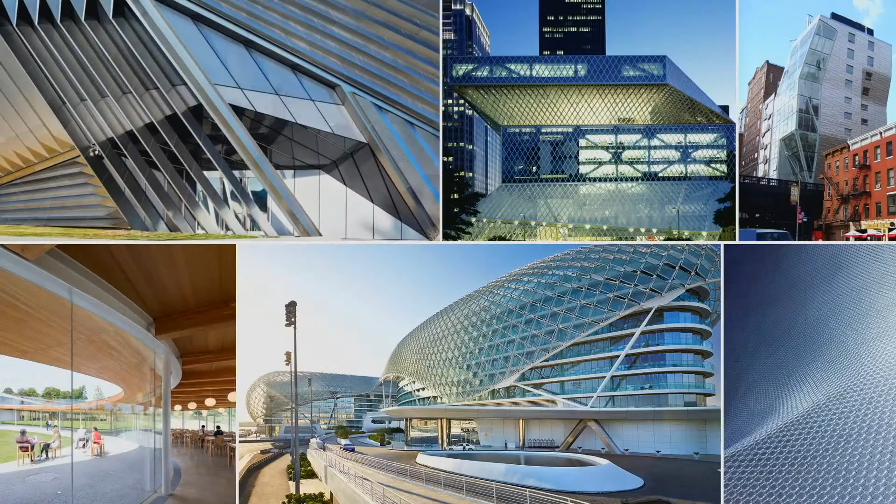We've had the good fortune over the last, actually we're 20 years old next year, of working on really spectacular projects throughout the planet with spectacular owners, architects, contractors, engineers, of all sorts of scales, materials, locations. It's been a wonderful experience, helping develop complex projects, beautiful little art pieces, very fast timelines, all sorts of conditions that come across when making complex facades.

Specifically, I want to talk today about what we view as integrated design and information documentation. It's a sort of philosophical stance we've taken on how to produce facades, how to document facades, how to see through facade design from an ideation stage all the way through to construction and on-site, and how we work through that process.

We tend to work as early as we can in the process, helping owners and architects technically develop their facade. Over the years we've had this idea: why can't we see this process through a bit further? So we've taken on opportunities to engage more in the construction process and be involved in the built product itself, whether through a self-performance aspect, working under a contractor, or as part of a design build team to develop facades and help deliver them all the way through from ideation stage through construction.

And so it kind of started with this early class of projects where they're a bit smaller, or they're a bit smaller roles, but sort of developing this idea of how do we take this information and produce the facade, and how do we produce something that is both meaningful from a philosophical standpoint, because that's kind of what I'm interested in, but also from a constructability and a process standpoint.

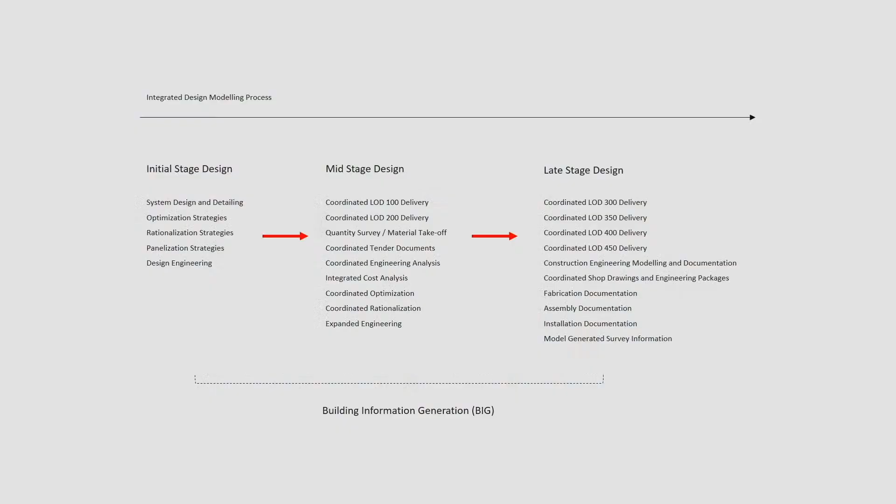Because at the end of the day, you're really interested in how things get put together, what are the logistics as it moves through the factory, what are the logistics as it moves through the site, and how do we help through this process. So I'll touch on this extremely briefly, and then get on to the secret project, which gives me a lot of anxiety now because it's way too important now.

In this project, we were providing panelization, modeling. We provided the final engineering, the final system design, final LOD 400 fabrication modeling, all fabrication documents, all assembly documents, and all assembly and site coordination models and documentation from a small integrated team. It's one of those projects where drawings don't make any sense.

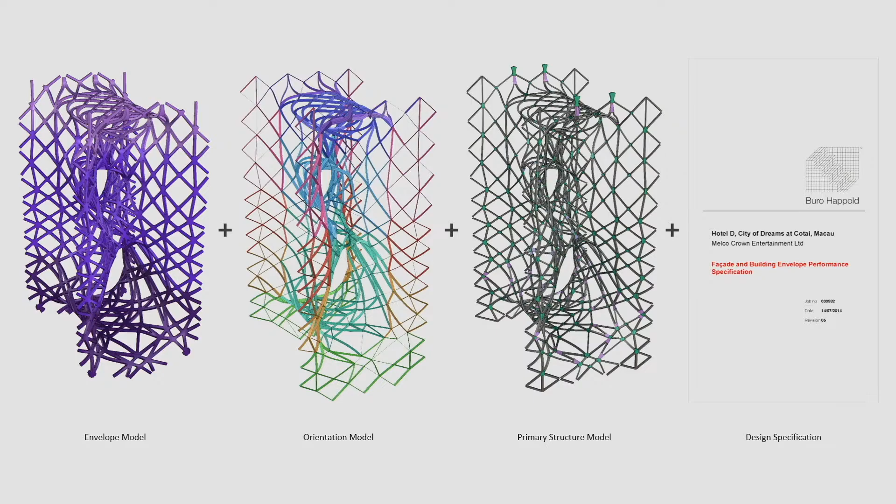There's just no reason. I think there were 3 or 4 details for the exoskeleton cladding as part of the tender package. But really the most important bits were the geometric models defined by Zaha that gave the envelope as a sacred surface, a structural orientation, structural model, and the specification in this case from Buro Happold. These sacred objects, you put them together to formulate a larger project.

In this case, we were tasked with filling in the blank. So we had the structure defined by Buro Happold. We had the envelope defined by Zaha. We just had to fill in between to make sure that it actually attached to each other.

You get a sense there's an infinite number of conditions as you're moving through this project. We view it as a primary challenge as an author of design, of a model, of information. It's easy for us to understand how this thing goes together—we've put the models and scripts together. But the real challenge is describing it down to the component level, to give to a guy in a factory you've never met, for him to give to another guy in another factory, and so on, until you've got 300 people between you and putting this thing back together correctly. So this is the philosophy we embed in all this information generation throughout the process: how do we tell the guy making this bracket to convey the next bit of information all the way to the final product.

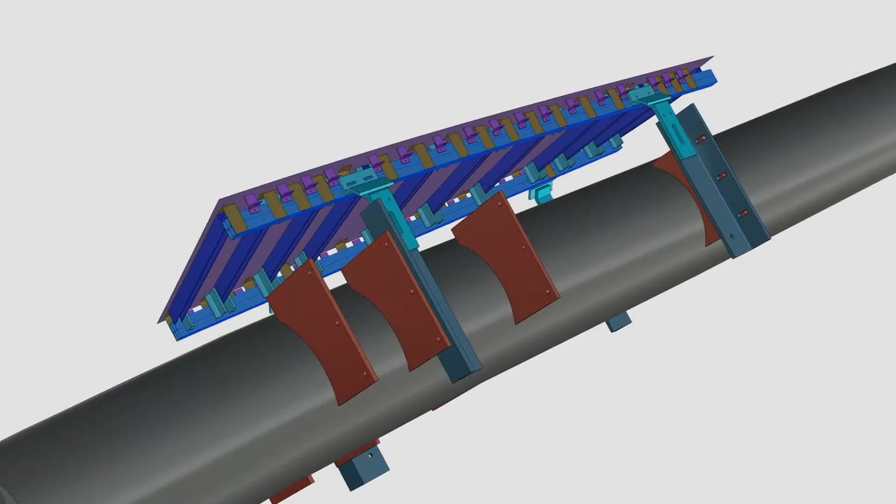You make a model and repeat these tasks—little tiny ideas you put together, repeating it over and over until you get a model that has a bit of chaos in it. And then this is now, as we know, good.

You see this other project, modest in terms of unique parts—we had about 1.2 million unique fabricated parts across about 18,000 square meters of cladding area. You get a sense of the primary structure, a bit of chaos, and the scale of the panels as workers put it together. At the end of the day, for us, it was a success because the built product looks like the rendering. We had zero installation issues, zero communication issues.

For me it was a very positive reinforcement of this idea of creating a coherent set of documentation through the entire design process, which has led us to a larger class of projects—much more complicated, much more ambitious, and even bigger than Morpheus.

The projects I'm going to talk about today—this is actually the first time I've ever talked about them, so it'll be a little rough, I apologize—include the Plaza Towers on the left, by Foster + Partners.

Another project we currently have is also with Zaha's office. We're working with Far East Aluminum in Hong Kong, providing design and fabrication services for a very complex tower in central Hong Kong.

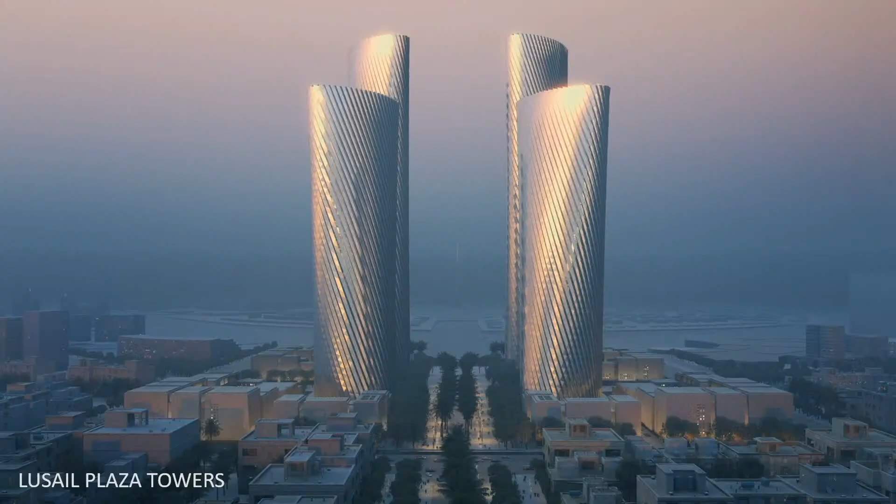Lusail Plaza Towers is a 4-tower complex in Doha, in the Lusail City, just north of central Doha, for anyone familiar with it. It's two 225-meter towers and two 306-meter towers, with about 16 podium buildings flanking each other. It's a central tower system being built as part of a new city that's the hub of the new World Cup complex, with the flagship stadium, Lusail Stadium, sitting right behind it.

Alutech is the facade contractor for all four towers. Hydro is providing the aluminum—about 220,000 square meters of a highly specialized custom 5754 alloy unique to this project. Technal is providing all the profiling and final system design for the unitized curtain wall system. It's a huge, wonderful team, and it's been a very intense process—we're building it in less than two years from start to finish.

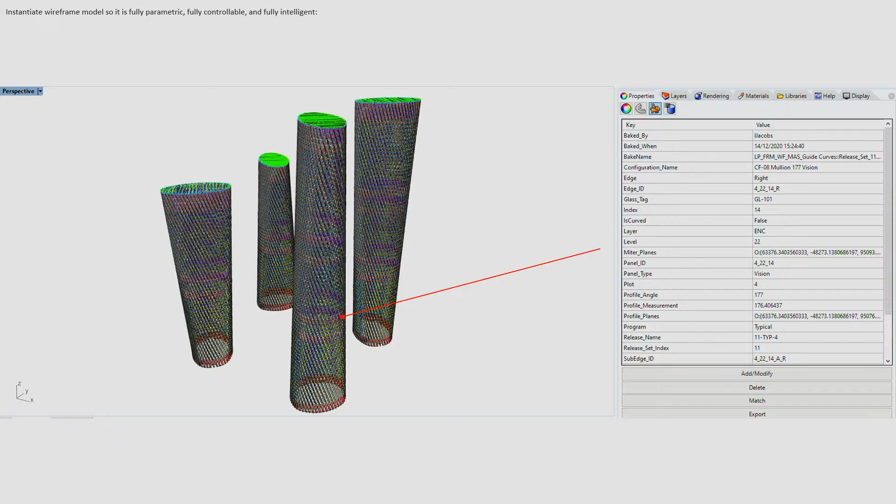It's a curve that knows where it lives in space. It knows what's next to it. It knows what systems it belongs to. It knows what angle it's coming in relative to the building, and what wind load is on it, all this kind of stuff. So you can start to peek and pull and analyze it in different ways.

To understand exactly what you're getting to and what you need to get at to make decisions. So the initial thing is we're having to rebuild the building to prove out to everybody that we can make this, that we can match the exact design intent from Foster's, and that we can also make it in a manufacturable way.

In this case, we're re-optimizing the building to get the exact distribution of glass panels that were tendered, but also tweaking a bit to optimize for the exact manufacturing process we want to put in play, so we can execute this as quickly as possible.

In this case, which I'll get to shortly, we're doing cold bent glass for the entire tower. There's not a single piece of flat glass—it's non-rectangular, and it's all cold bent, either from a flat panel pushed into place or a kind of molded cold bent panel.

Here we're looking at different strategies for different thresholds of cold bending—this is the amount of out-of-plane each panel has. We're looking at whether we're matching the SD geometry that was tendered, but also looking at the economics of the glass and how we can produce it, to find the right cost balance for Alutech to proceed with procurement of material.

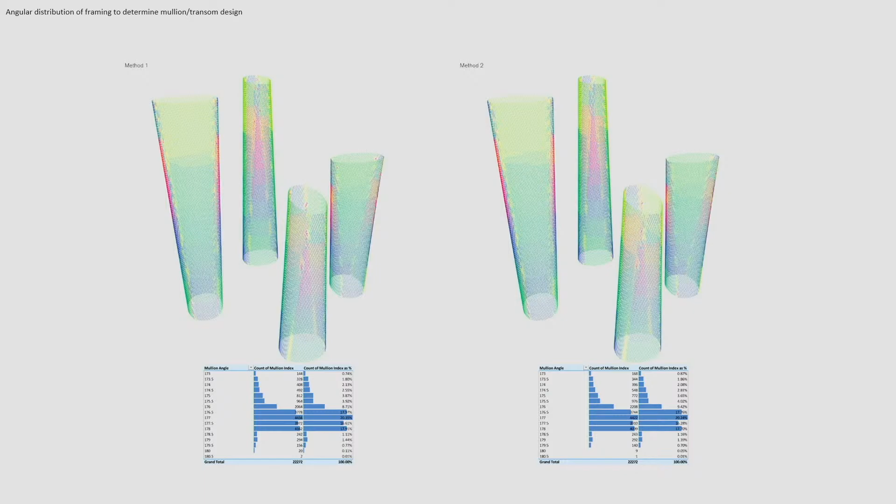In this case, again, these are all actually exactly the same model, which I think is a key point. Here we're looking at it because we're talking to Technal at this point, trying to understand the complete design configurations of what every single volume is going to be on the project. So we look at the model in different ways, measuring the angle between the panels so we can design the dies from an early point.

We're mapping all the wind loads to provide these engineering optimizations, so we can find local reinforcement if we need to, or find out our threshold and what conditions we need to design for. This really saves time and material, because we know we don't need to design for the high load case everywhere, but we need to find where we do.

In this case, we're working with Hydro specifically to optimize the panel width, and we're using about a 2.6 meter wide aluminum sheet. We're buying 11.8 by 2.6 meter sheets and anodizing them. Alutech actually built what I think is the world's largest anodizing bath as a result, to make these panels.

So here we're working with the whole supply chain to find exactly where we need to massage the shape of the tower and the shape of the cladding, so that we can procure all the material in advance. Thankfully, because of COVID, we had to get as much as possible in as quickly as possible, to make sure we could build this building in the time needed.

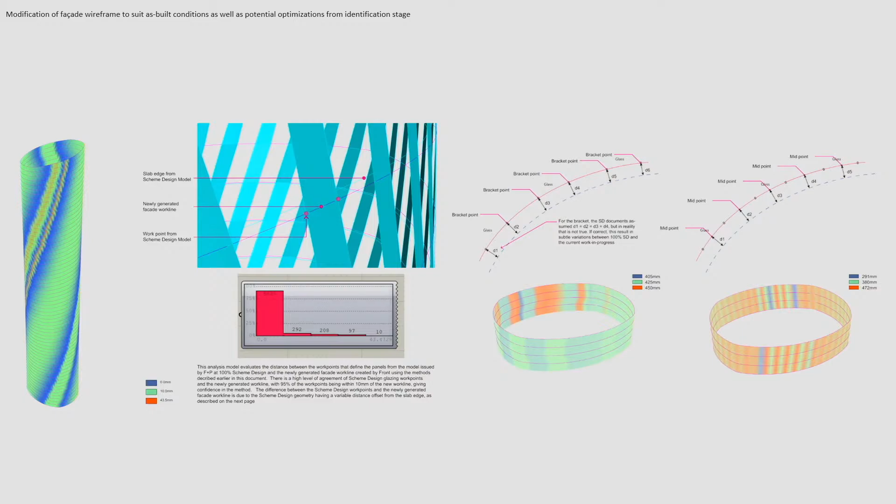Part of this is also a sort of global rationalization. You start to tweak the floor slabs a bit, and the overall mass of the building, because we're changing the shape of the cladding and need a response that changes the shape of the building. What's nice is we were able to change the building's shape way faster than the architects could finish designing, so we gave them the floor slabs and the rest of the building, defined basically from the size of the aluminum cladding.

Which I thought was a pretty unique experience. In this case, going back to the architects and proving that our newly optimized design fits within the original tendered process. So this is overlaying all of the models and going back to the owner architect to say, hey, we haven't changed anything, but we're trying to make this work within the procurement channels possible in the time we have.

Combining everything together, you get a fully rationalized building, full of really rich metadata that you can start pulling apart to analyze in greater detail. Another key thing you're able to do early on with these processes in place is build a fully constrained global FEA model of every single panel, every single connection, of all the towers, to provide all the reactions back to the slabs.

So we're coordinating on day one with the structural engineer. I think this whole model was about three weeks into the process, and we already had every single reaction to every single floor slab, and we were designing all the embeds. Very complex tower - same model, a little more detail, providing all the global engineering of every single panel, every single connection, from the same process.

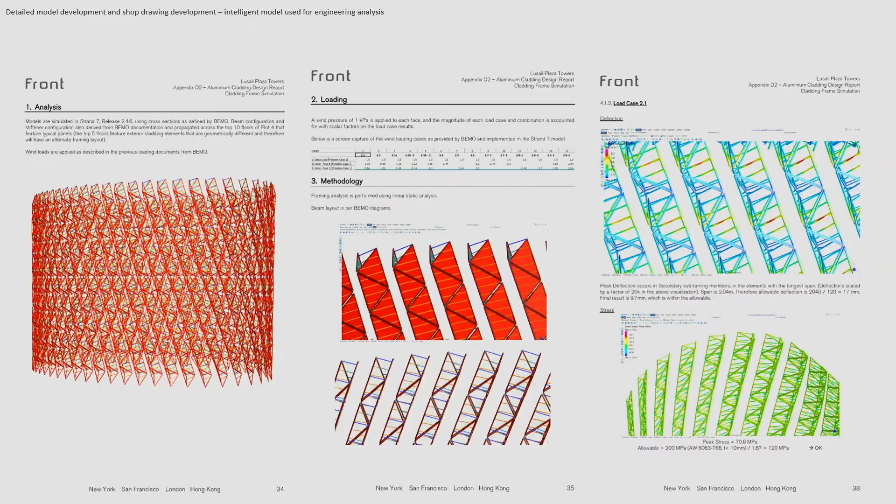This was the original, I think month 2, complete material takeoff of every single mullion and every single transom, which allowed the advanced procurement of an enormous amount of material.

So then we get into, that's the global analysis, and you dive into, okay, how do we actually make this thing? I'm going to try to tell this story - this is the first time I've told it - about how we thought about the cold building panels, and then from the glass perspective and the framing perspective, because they're two sides of the same coin.

So conceptually, you have a tower, and the easiest answer is to triangulate everything, but the architect was not interested in triangulation. So instead you have quadrilaterals, everything at a 20-degree angle, this parallelogram spiraling up the building. Well, how do we do that? How do we deal with that?

The easy, straightforward answer is flat panels are cheaper, flat panels are better. However, on a multi-curved surface, a flat panel starts to get this popping effect. That popping effect has huge implications - the thermal sustainability implications are massive. You have huge thermal bridges, a lot of condensation risk. You just end up with a leaky, poor-performing building. It's not a good strategy.

Secondly, it's very, very expensive to make. You already have a very complex facade, with millions and millions of small subparts that you now have to consider to manufacture and get right - which then will leak.

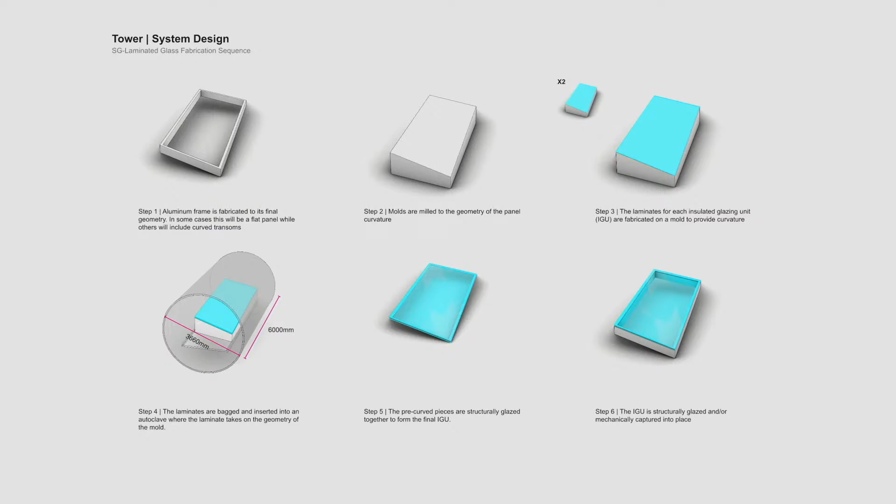So in this case, we did a slower but more expensive method of cold bending: an SG lamination where you heat and pressure in an autoclave. You take 2 pieces of glass, laminate with SGP, put it on a mold, then put it in an autoclave, and it comes out in the perfect shape. This works well for very subtle curvature, because you can get almost any shape out of it to a certain extent. It's a very slow process, as you can only do a very limited number of panels at a time, and at the end of the day you get extremely subtle curvature out of a piece of glass using this methodology.

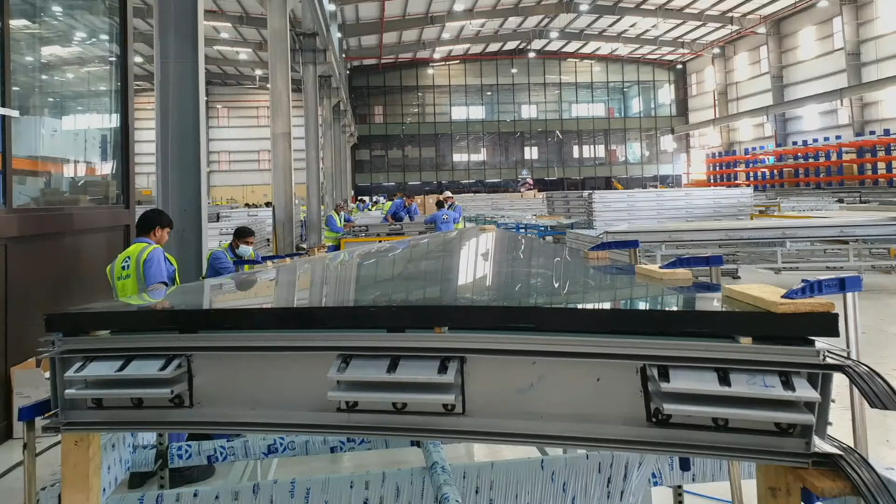Working with Alutech, they've found a pretty good way to perfect some of these methodologies at a large scale. You can see here a typical flat panel that's not curved, and get a sense of the curvature we'll see on the project as these panels are navigated. This is a curved panel with at least one curved edge—probably about 225 millimeters out of plane, which is quite extensive. Here you can see the curvature on this one edge, which forces a particular manufacturing process.

This is actually a very technically challenging process because you've got to cut everything at the end of the day from a flat piece of material. The glass comes flat, off the float line as a rectangular sheet, and you unroll that into the curved shape—it's always bigger than that flat piece. So we have to determine how big a flat piece of glass we need to buy, and what shape we need to cut that flat piece into to get back into the curved shape.

And whether that surface matches anything in reality, you actually don't know. So we needed a way to inject reality into a model to pull out what that piece of glass is that we need to cut.

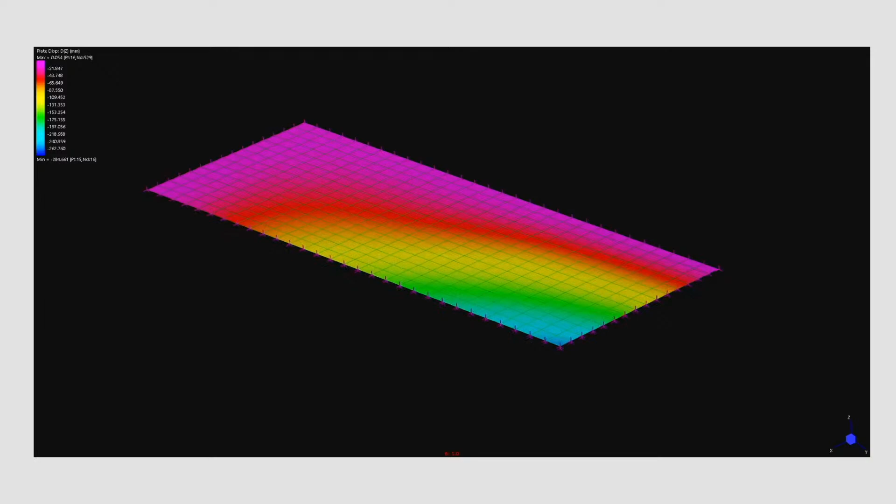So in this case, we built a finite element model of every single piece of glass on the project and pushed it back into its flat form. We did that many times to find out where we have stress conditions, where we have deflection concerns, all this kind of stuff. But most importantly, it gives us rules about how we can interpret the piece of glass and how we need to cut it.

You can kind of see here, we haven't made any good images yet because we literally just got permission this morning to do this. But the numbers on the left indicate the amount of deviation from a straight line. There's an actual subtle curvature when you unroll this piece of glass along the long edges that you need to cut into the flat shape, such that when you put it in its curved shape, it forms into the right part.

We do a poor man's machine learning through regression analysis of literally thousands of panels to determine the rules in which to make that glass and make those shapes work, and apply those en masse. At the end of the day, we end up with two drawings: one shows how you cut the flat piece, and here's how you put it together, and here's the CNC information to do that.

So you go through this extremely massive, convoluted process to give a DXF file to basically a CNC machine to cut out a piece of glass. But what's really nice is then they just stick the two pieces of glass together, it goes in the right spot, and no one has to think about anything.

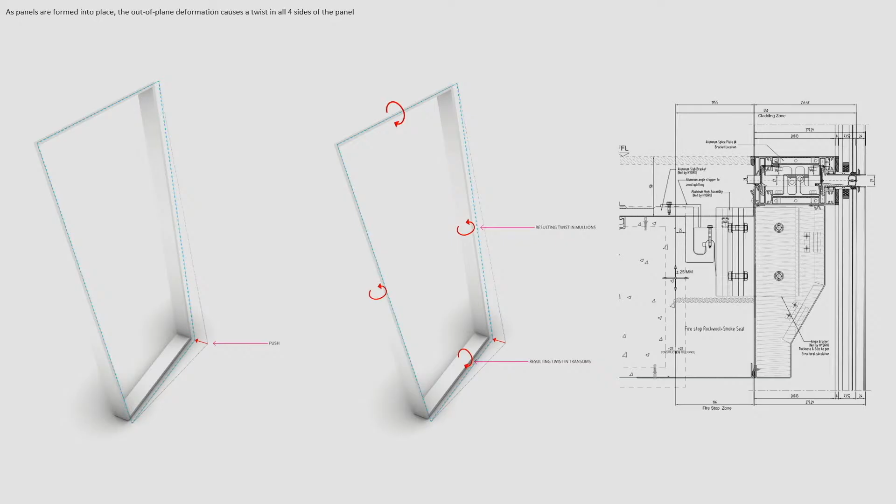When you start to push one edge, and they're rigidly connected at the corners, everything starts to twist. The mullions twist, the transoms twist, and so how do you prevent that from happening? Because there was no scenario where the architect or the owner was going to tolerate or accept a transom that is twisting on the edge, especially when your finished floor is meeting up flush with that.

But now it's like, okay, how do we define a system? How do we think about a way to ensure that the transoms themselves don't twist? There's a couple of geometric concerns, but most importantly, there's a sort of assembly and warranty concerns.

So in this case, we have you put the transom in. The ideal scenario is you let the corner of the transom meet up with the bottom of the mullion. That introduces a gap between the transom and the mullion, and that gap is right where your glazing tape goes. The glazing tape, though, suddenly is making a jump, which starts to maybe void some warranties, may create some assembly conditions, and this is kind of a no-go scenario from an assembly standpoint.

So then we said, okay, we need to find—actually the glazing tape line is going to define the overall geometry of the framing system, such that there's 0 or like 0.2 millimeter gap that is acceptable. We continue that glazing line all the way around, and then re-rationalize the entire building wireframe geometry about that glazing line, such that you can have a continuous seal to set your glass down.

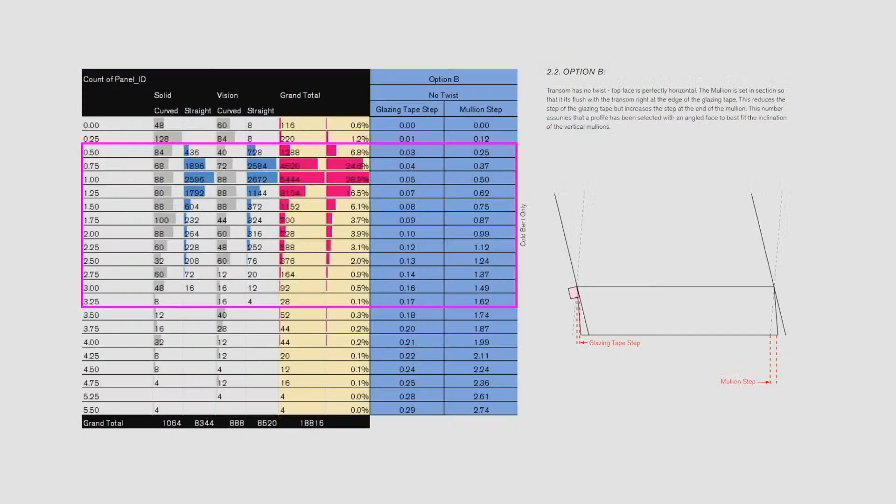Another key aspect of this is to trick the transoms into being flat when they're installed. What we do is a complex mitering of every single transom on a double angle cut, such that when you screw them together, it does a counter twist and undoes the twist it wants to do when flat. It's kind of hard to explain.

Maybe a video will show it here in a second. But on the left, you can see the traditional, pre-rationalized approach of the framing system. If you did not do any rationalization, you would have gaps that go across. So you micro-adjust every single transom and every single mullion to get a very flush surface for the glazing tape to go around, so you don't void any warranties.

You get a sense here, this is the first framing system we made. It's the best video I could find on short notice, but you can see as they push it together, very low tech, trying to get it the right shape with wooden blocks, you can see the mullion twisting out of plane as it comes into line with the transom. So the key thing here is we build all of the frames in 3 dimensions in their final twisted form.

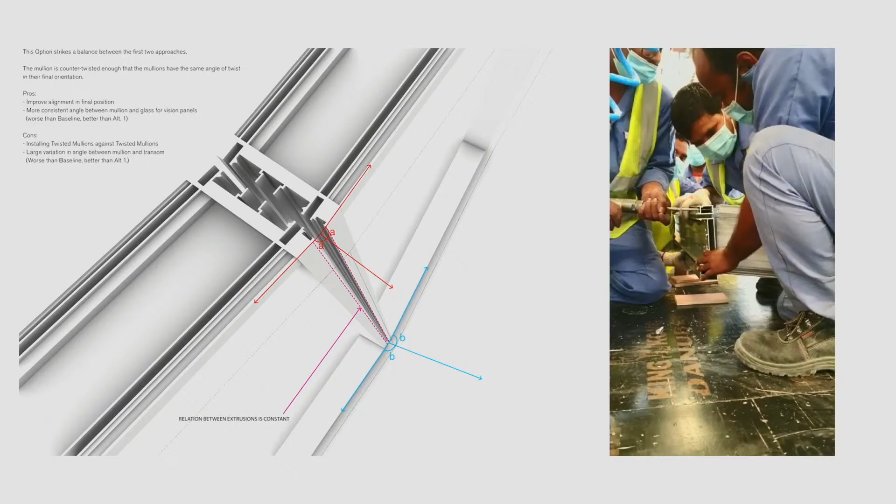We put the glass onto this final twisted frame. We add the silicone there such that there's no residual stress in the secondary and structural seal between the frame and the glass, so that when it goes into shape on the building, we're not going to have any permanent stress in the structural silicone.

Here's an example of one of the more egregiously twisted panels we have. But we have roughly 80,000 square meters of glass across 13,000 panels. Every single one is unique. There's zero repetition. They're all slightly different and slightly out of plane.

There's a whole other bunch of stuff I could talk about regarding how to actually manufacture this, how the whole workflow goes from the wireframe into the CNC machine, but another time.

Here's us roughly a week ago. We've got approximately 100 stories worth of building built in about 10 months. It's been a Herculean effort from everybody at all the contracting teams and all the subcontracting teams. It's been a bit of an insane ride, but here we are.

Oh yeah, crazy thing - tip to tip, the panels are 7.3 meters. Manufacturing and moving around and trying to control a 7.3 meter cantilever panel has been an interesting challenge. So I probably went over, but...

That's a secret project for you there. Evan, thanks a lot for all your explanation. What was really true - he just got this morning the approval to present the project. It was just this morning when you received the email that you're allowed to present it, and thanks for that. It's broadcasting worldwide for the first time. Thanks that the Alutech guys are with us. So if the audience in-house today has some questions, don't hesitate to go to them.

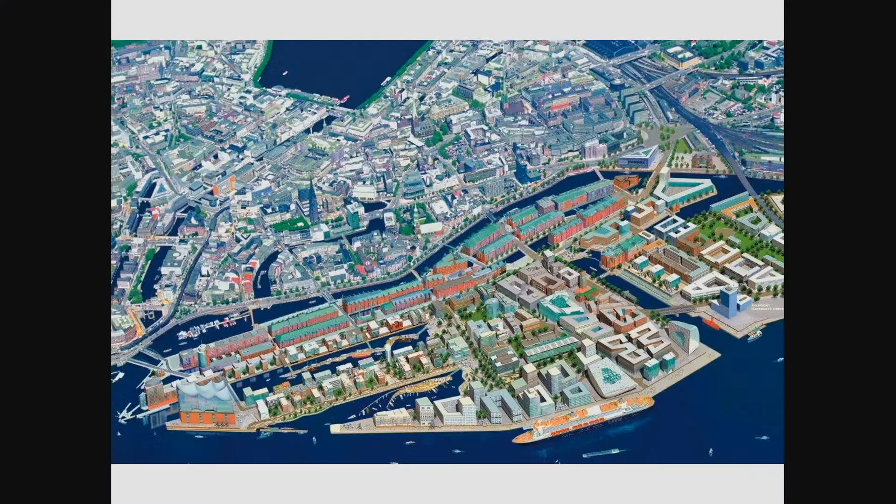What we have here is the HafenCity, Hamburg, a very courageous project that started off in 1992 with a master plan from ASTOC Architects out of Amsterdam. What you see in the north part of the picture is the old structure of Hamburg. You may see the old Speicherstadt, the old warehouses that separated the old part of the city from the customs harbour and the south.

All these buildings in the area south of the Speicher buildings have been built in the last 15 years, and there's been a huge amount of construction - that's only half of it. The other half of the picture is now in construction. It's a very courageous project, and through that we've been very fortunate - I think we're now on our fifth project within the harbour city.

What you may recognize also in this picture is the work of our colleagues from Herzog & de Meuron, Basel - that's the affectionately known 'Elphi,' the Hamburg Philharmonic. Wonderful building, very controversial, very expensive, but now that it works, no one says anything about the controversy or the price, which is a bit of a tip for the future generally when we have these problems.

What is not in the picture is our colleague from London, David Chipperfield's Elbe Tower. The Elbe Tower is, or will be - it's now groundbreaking - 240 meters high. Until then, one of our buildings will still be the highest building in Hamburg. You can see the Elphi in the background.

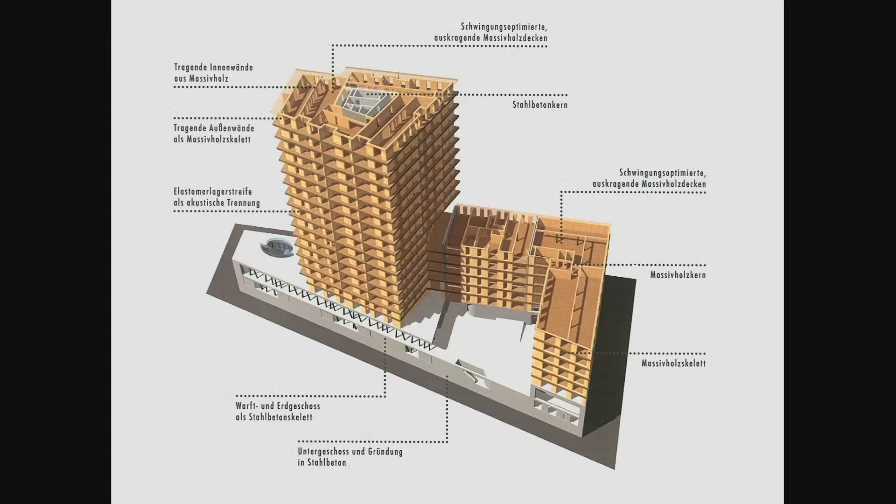This sketch basically shows how much concrete we're actually using in this project - as little as possible. Where we do have to use it is in the basement, quite sensibly, and in the plinth of the building that you see here in white. Rather like our spines, we have the core, the staircase and the lift core right in the middle - that, of course, is reinforced concrete. But everything you see in brown around it - the massive floor slabs, the columns, the facade, the walls - it's all in wood.

That was our main aim, because when we talk about projects now we talk about carbon footprints - it's not just a fad or a word, it's something we now have to take very seriously. In the 80s and 90s we talked about how much a building costs, but now we talk about life cycle costs. This is becoming very important to our clients because the money they get for investment is green money - large financial institutions want to make sure their investment goes into a green project. It's interesting how things have changed: clients from 20 years ago who weren't interested in sustainable building are now the ones putting it biggest on their websites, saying we're very green developers or investors. Things have changed a lot, which I think is a good thing.

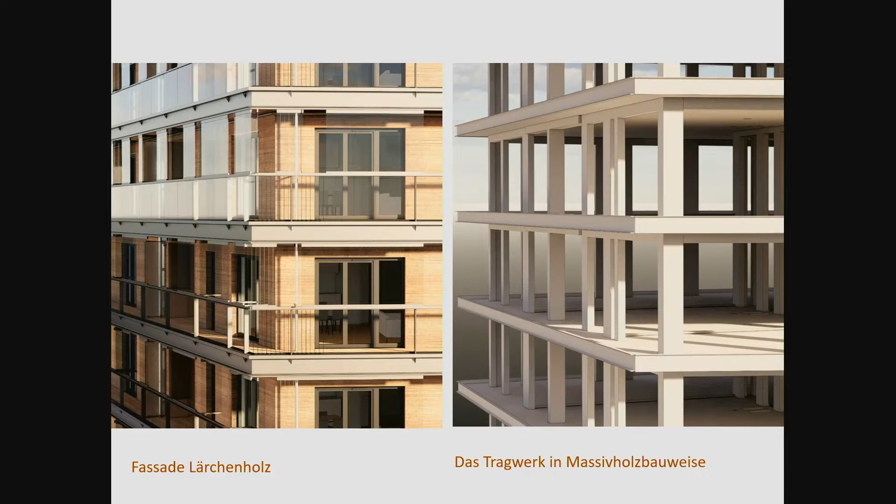This is what we call a Zug Tragwerk, a ring beam if you will, which holds the building in compression. We can see it here on the left-hand side. If you can imagine a wooden barrel, one of those old beer barrels, with steel belts that keep it in compression - that's a very similar concept.

Wood has the slight problem of minimum oscillation in high-rise concepts, and because of that we have to have these steel ring beams that keep the whole thing together. Of course, we didn't know that in those days, but now it's something we've brought into low-rise buildings as well. You can just begin to see the floor structure.

I have another drawing - we have 24 centimeters here of massive wood, and then we have a big issue from floor to floor, apartment to apartment, of acoustics. Acoustics was the biggest issue in this project. That may surprise a number of you, but acoustics is cancelled out or solved when you have mass. Mass is weight, and we don't want weight - we just want the necessary structural cross-section to perform the function. That's the 24 centimeters you see here.

We're also talking 6 meters long and 1.25 meters wide - that's the planks, the deck systems that we use. On top of that you have a lightweight screed, and then underfloor heating. In total, we were at 50 centimeters in those days. We're now down to 45 centimeters as of the complete construction.

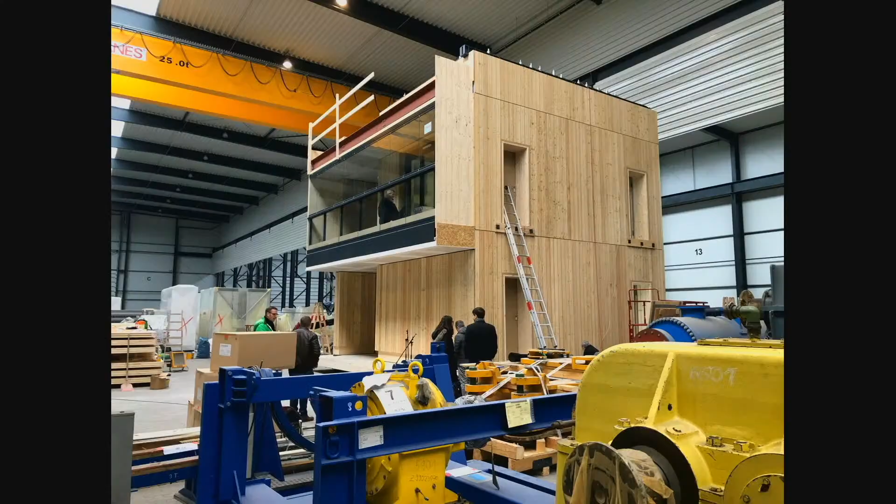Because of this building - this is our mock-up, and this mock-up basically provided us with all the information the planning authorities needed to give this building a green light. Normally when we do mock-ups, you can see aesthetic issues in the facades. No, this was purely technical - we had to find out where the building's problems were and whether our details actually worked.

So this was it, and we had a team of scientists that went in there for about a week. They took all the necessary data and did all the necessary tests, acoustic from floor to floor, horizontal from one side to the other.

In any case, we gave the planning authorities the necessary information they needed to give us a green light, and that was, I think, for all of us, a very joyous day. We are now actually on, I think, about the ground floor. We'll probably be starting in about 6 months with the wooden construction.

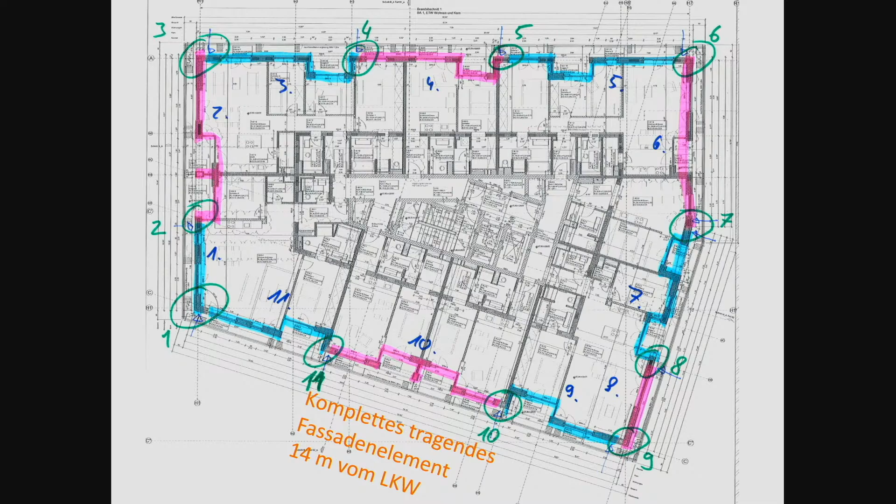This sketch basically shows one of the greatest advantages with timber construction. We're able to do between 7 and 14 meter prefabricated wooden facade elements, and they get rolled in on a low loader and then put into position, if not shipped in. So there one saves, of course, time and money, as with the previous example, the ceramic tower that I showed first.

The issue that we have here at the moment, especially in high-rise buildings, is that wooden construction is still 8 to 12% more expensive than conventional construction. Some clients see that as a great barrier. Some clients say, I don't care, we want to find out what the future is about, and wood will play a part in our future.

I'm absolutely convinced aluminium will continue to play a part in our future. You can't compare an aluminium facade to a wood window facade. It's obvious there is a hybrid of thoughts going on, but still it's a more expensive building typology to create.

I won't go into too much detail, but what they are basically explaining here is the decoupling of the sound that passes through the floor going from one apartment to the next. Those are some of the details that we had to work through with our acoustic engineer as well as with Assmann, and obviously try to maximize the amount of wood in the building.

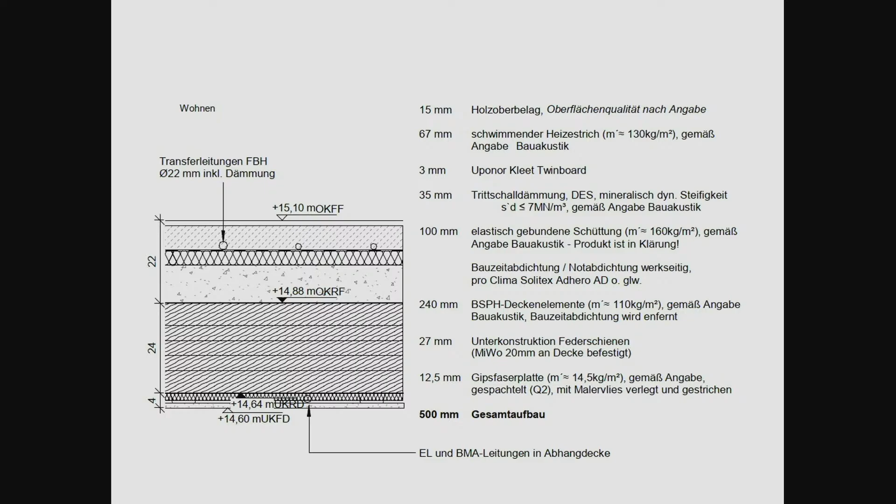This is the detail that really has caused us the greatest of issues. Because it's a lighthouse building, the client wanted to have wood on the exterior part of the building, and we supported him in that. But it is actually an issue where I would seriously think in the future whether that's a good idea in a high-rise building or not.

We have to generate a dry, if you will, sprinkler system that is positioned in the area of the balcony, which is firstly very difficult to detail, and secondly is a very expensive undertaking.

I firmly believe in the future of wood, although this is a project that a lot of people will notice when it's built. But I think the future of wooden buildings is not necessarily with facades, and not necessarily with high-rise buildings. I really believe the future of wood is up to - in Germany it's 22 meters that's classified as a high-rise building after that - anything up to that, because then you don't go into an area of fire regulations which are very, very difficult to construct in wood, but you basically keep yourself in a comfort zone which is financially viable.

I think that's something that's going to happen and change in the future. We've got 2 or 3 projects at the moment where the massive structure internally is wood, but the facades themselves are ceramic, brickwork. There's no dogma to using another facade material—the idea is to create as much wood in the project as possible. It's all about the carbon footprint. That's again something we had to learn.

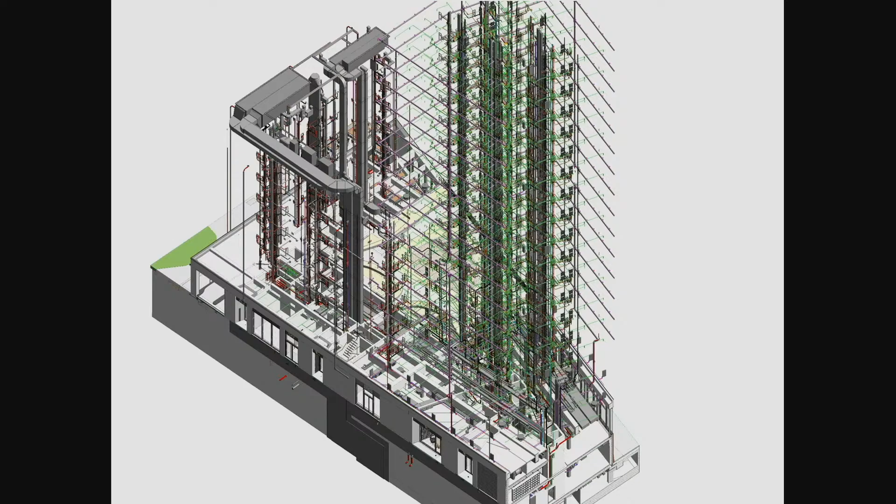I was mesmerized by what Evan was showing before about 3D design. The kind of architecture that Foster does is phenomenal, and one needs these kinds of programs. We changed probably about 7 years ago from 2D drawing, from MicroStation, to 3D Revit. The whole office was actually against this program—it was mutiny. But now it's the best thing that could ever happen to us. The communication on the level of MEP or structural engineers is phenomenal. It's quicker, more efficient, we find the problems a lot earlier on.

Why am I saying this? Without 3D, we could not do a timber building of this complexity. We are required by pre-design to have 50% of our 1 to 5 details—that's not something we were ever used to doing. The only way we can do that is to work in 3D, because we identify the problems earlier on and we're able to solve them earlier on. Revit—I'm not really a computer geek myself, although I used to love MicroStation—is really something that has changed the way we design and think about design. But it's not an obstacle, it's a huge advantage.

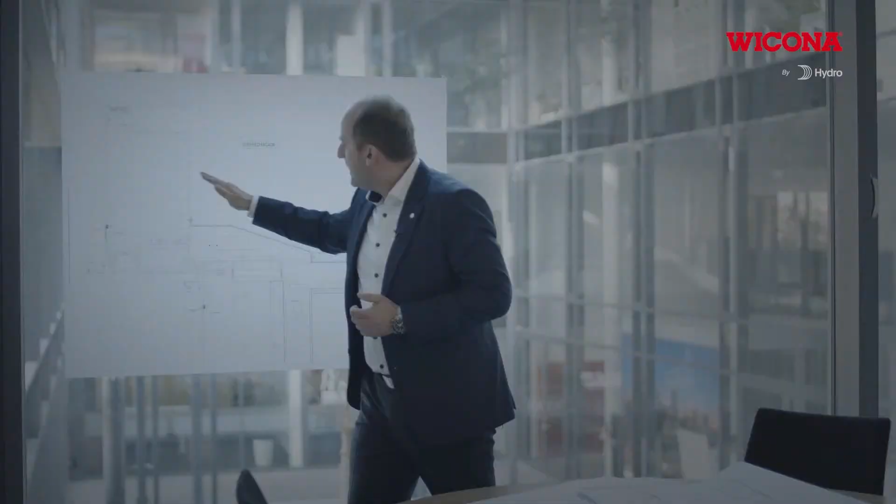But we feel we need to go beyond. When looking at the life cycle of a building, you will find that the upfront emissions represent one third of overall CO2 emissions. Our aim is to reduce by half our CO2 emissions by 2025. To achieve this goal, we are going beyond recycled low-carbon aluminum products and running every part of our business as sustainably as possible. It begins with the origin of the metal. We use Hydro Circal aluminum, which has among the lowest carbon emissions in the world.

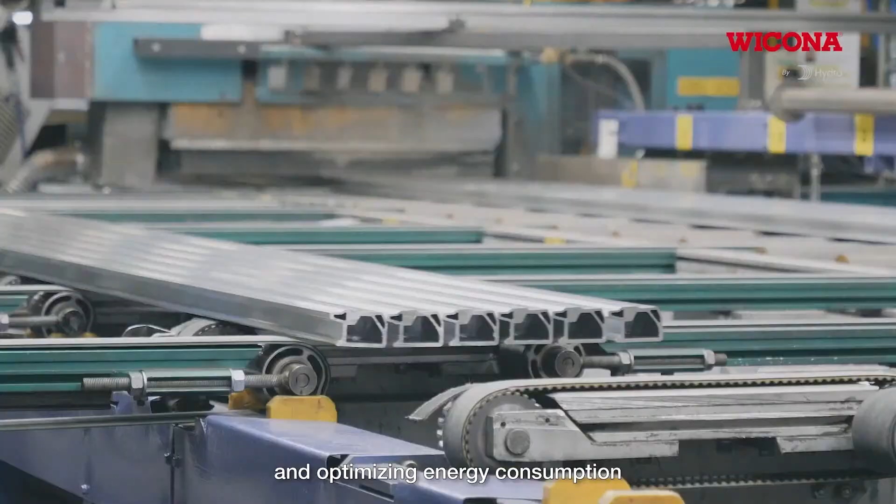We also go beyond aluminum by working with suppliers of recycled components who share the same values. We are continuously reducing and optimizing energy consumption at our production sites by investing in cleaner, renewable energy. And we are using less packaging materials and delivering in better ways. In the end, it all starts with us. Sustainability flows through every decision we make, every action we take.

But let's see the broader picture. We are going beyond ourselves to make a bigger difference. As a part of Hydro, we commit to empower 500,000 people with education by the end of 2030. We are all in this together. We know we can make a difference because we care about building a better future. Beyond tomorrow.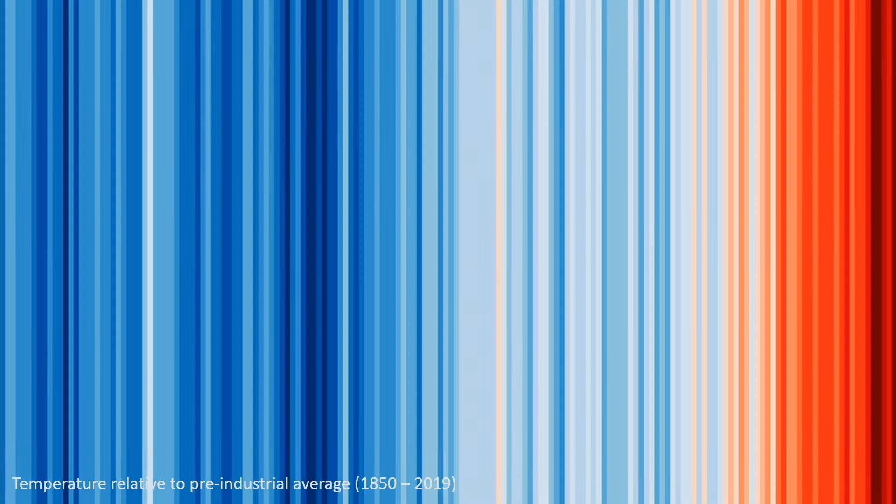When we talk about sustainability as a term, I think in 99% of cases we're talking about the energy performance of the building, and more concretely about carbon emissions. We're all aware of the turbulent weather occurring increasingly over the last few years, which is without much doubt related to the rise in temperatures over the last decades - which in turn most people agree is a direct correlation of the carbon emissions that have occurred since industrialization started roughly 250 years ago. I think that's now common knowledge.

We all know that construction and buildings play a relatively high part in this, estimated at 40% of current CO2 emissions. Zaha Hadid Architects was a founding member of UK Architects Declare in 2019, before the pandemic, where architects came together for the first time to formulate a common goal. It's a very broadly formulated goal, and it's probably fair to say it wasn't really clear, and probably still isn't really clear, how we get to where we want or need to be.

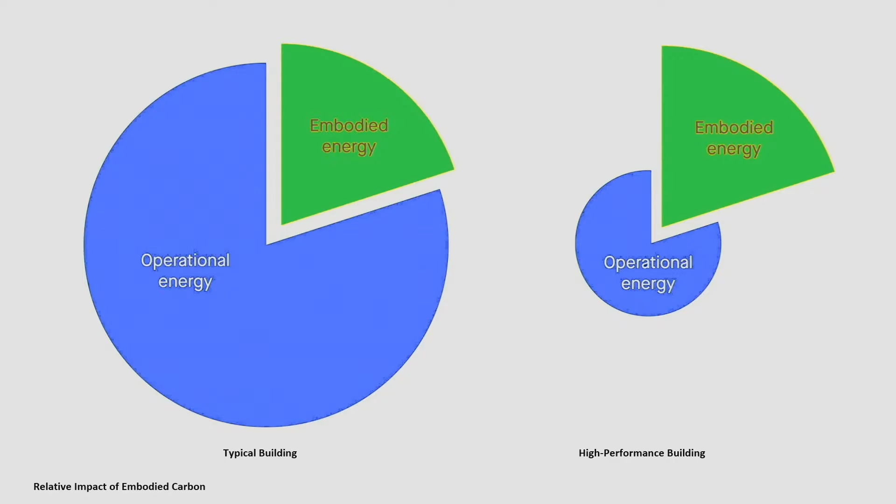The reason that has come to the fore is that as buildings become more efficient operationally, the embodied energy in the building becomes more prominent and plays a much larger relative role in the overall budget.

I'm sure there are many numbers out there, but there are estimates that with highly efficient contemporary buildings, the impact of the building material on overall CO2 emissions can be up to 90%. So whereas previously we were thinking about the building itself and its lifetime, we are now increasingly forced to think about the life cycle of the building and the whole process.

We need to learn to look at these figures, which is new for us, I have to admit. It may not be new to many in the audience, and I've had interesting conversations over the last day or so about where the facade industry is at. I was very impressed with the rigor and depth with which this is pursued, and it's something we can learn from as architects.

The question for us then is, if you look at these figures, do you need to start thinking about substituting materials you're more used to using for others? We've just heard an example where timber was used not only for the structure but also for the facade. Or is it up to the industry to look at bringing some of these numbers down by being intelligent about how the material is generated? It's something we're going to look at tomorrow, I think.

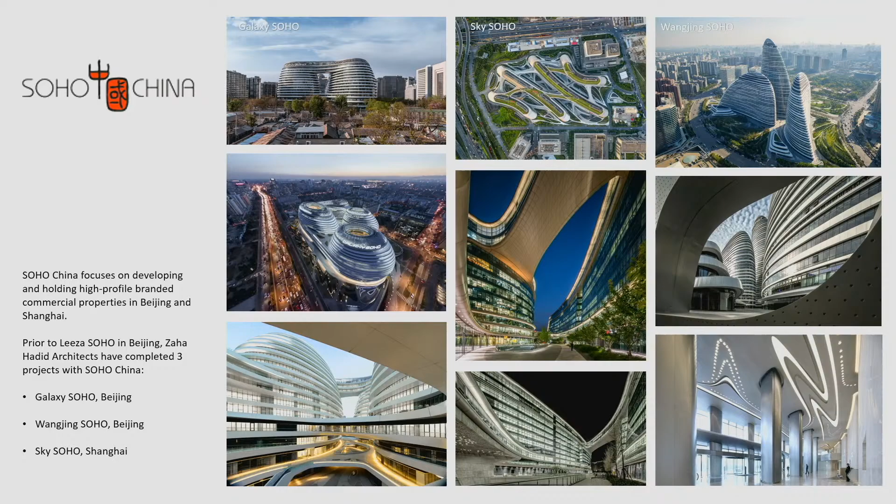Soho China is a client we've been working for and with for a long time. We've realized three projects with them in Beijing and Shanghai, very similar office buildings, mainly for small to medium-sized companies. For an office building, they have an unusually large component of communal spaces, atria, courtyards, and so on. If you go there, there's quite a hustle and bustle, very lively, with a lot of small business going on. Some have client-facing shops almost, and others are more traditional office spaces. So the communal aspect is important.

The Leeza project is in a new part of a new development in Beijing, the Lize Financial Business District. It's between the second and third ring in Beijing, and it's very much a mixed use district, located at the junction of 2 new metro lines. Importantly, it's the end point of a direct connection to the new Daxing airport of Beijing, with a high-speed rail connection leading directly into the center of Lize.

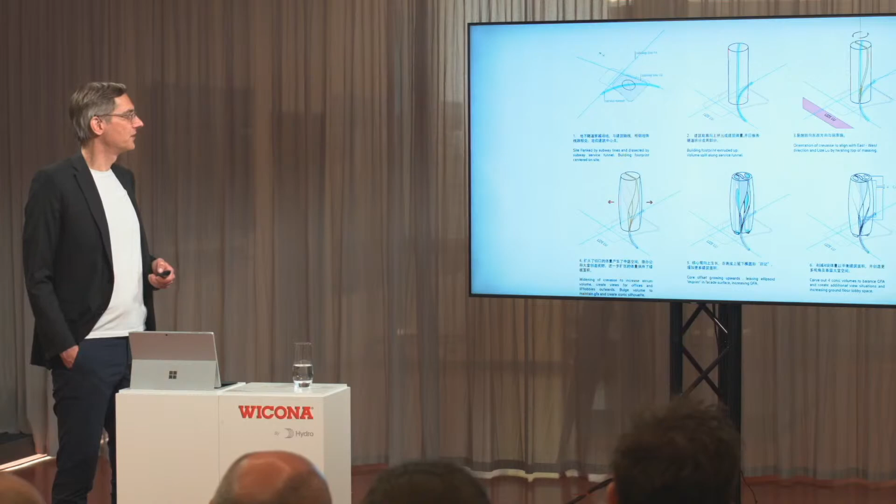You can see it a bit more closely. The project is located at the center of that new development, next to the transport center, and crucially at the junction of these 2 metro lines. These 2 metro lines are connected via a service tunnel that runs directly underneath the site, and that became the factor that determined the building form.

It's a very simple operation to come to the final result. The fact that the building was diagonally dissected by this line made us design basically 2 buildings - 2 separate towers, if you like, which are then connected with each other by a common skin, and they create this huge atrium in the center of it.

The atrium itself was shaped by twisting it very much. You can see that the direction of that cut was the initial outcome, the starting point of the form finding, which was then manipulated. It was twisted in a north-south direction.

The traditional plan of Beijing is a very ceremonial plan. The city is based on a north-south, east-west grid, so that's something that was referenced, and then through a series of operations it was manipulated to generate more space and generate views to let more daylight into the heart of the building.

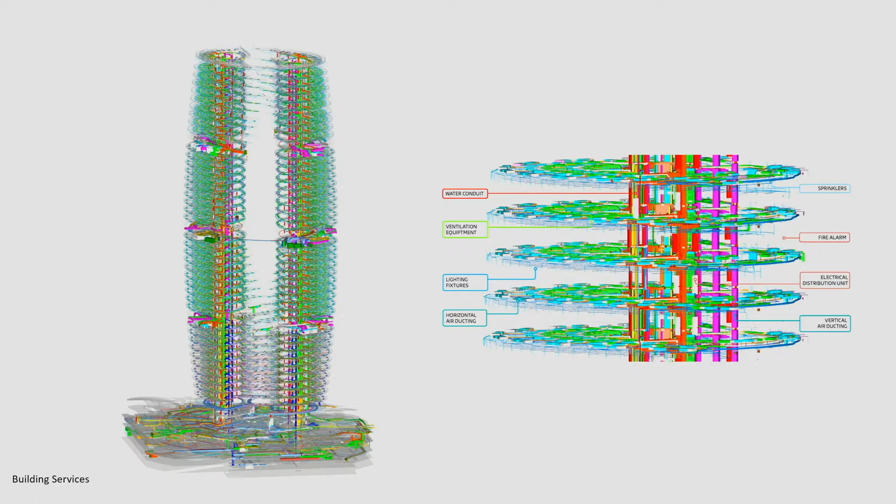About the facade or the envelope - it's a unifying skin, but it consists of very many different facade systems because there are so many different conditions in the building: the office facades, the atrium facades, and then special pieces at the base and the top as well.

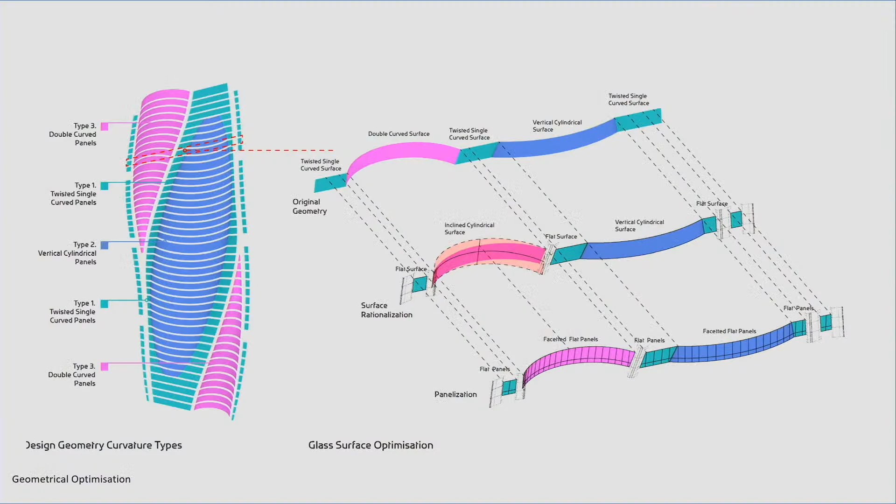We've heard a lot about this from Evan, the process of optimizing the geometry. There's obviously something that needed to occur here as well - panelization, and then trying to minimize complexity as much as possible by approximating the original shape but with a much more rationalized geometry. Later on, panel size and material choice were also parameters in the process.

For the office, one of the elements developed was this facade, almost like a sawtooth facade, which has two advantages. One is that it allows the introduction of small flaps - we saw one earlier today on the site visit - to create a mixed mode ventilation system in the building, so there's an element of individual ventilation possible. But it also helps negotiate the geometry, because it looks deceptively simple, but there's a slight step up the facade, and the sawtooth geometry helps negotiate that across the entire curvature of the tower.

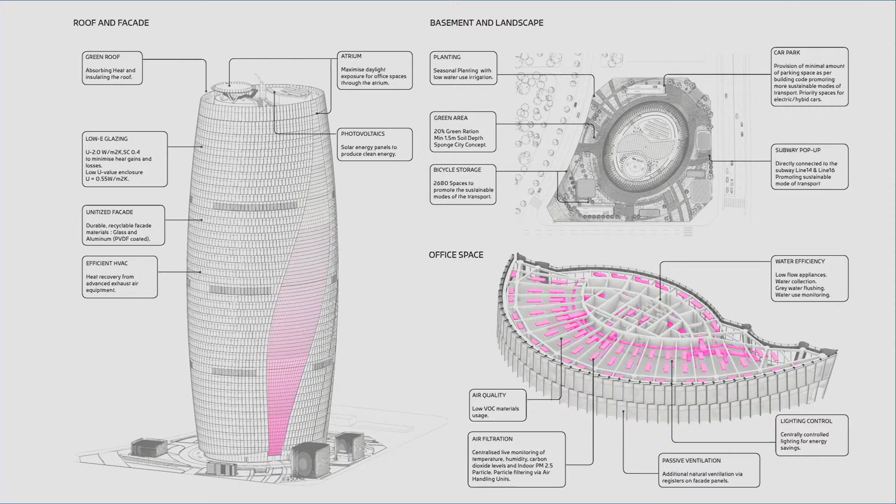The aim was to achieve LEED Gold in the design process, and it was achieved. Through a series of measures - it's a fully glazed building, but it's a high performance facade, so that was one of the measures. But really the focus lay on the building systems, which were highly efficient in the way they were designed - the management system, everything with the help of BIM that could be. The office was able to start that process very early on and integrate it much more efficiently than with a traditional way of working.

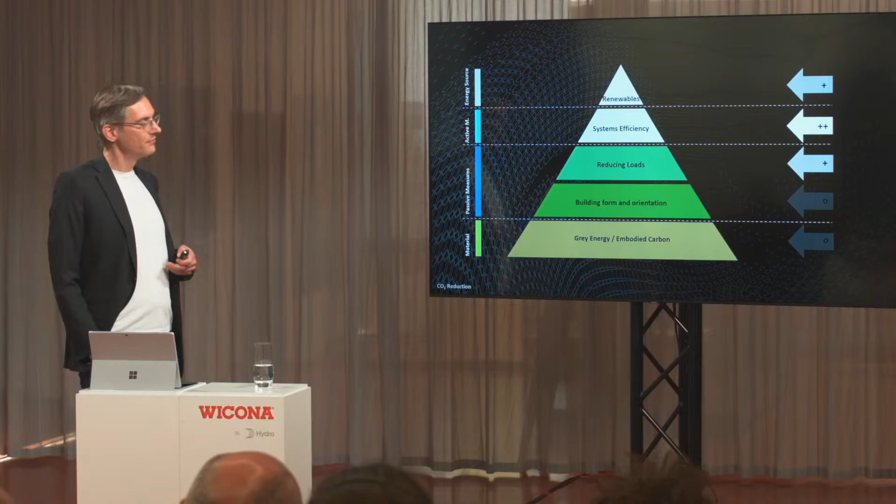Embodied carbon, gray energy—as I mentioned, it's a steel and concrete building predominantly. There's something that can be done about this with current technology, but that is still not fully developed globally. It's a very regional availability that is required, for example working with the right cements or working with reused aggregates for concrete. So that's something in this case that was just not available.

What's also interesting is the way buildings are erected and designed. It comes down to the contractual role that you play as the architect and how much control you actually have over that process. Building in China means you're in a working relationship with a local design institute—they take over the design process very early on, and your influence in the later design stage is quite limited. That's something that occurred here as well.

The next project I'm going to is one where we had much more control during the entire process. It's a different brief—this is KAPSARC in Riyadh. KAPSARC stands for King Abdullah Petroleum Studies and Research Center. It was built by Saudi Aramco for KAPSARC. It was a completely new research campus just outside Riyadh, consisting of 5 buildings and a common area. The aim was LEED Platinum at that time.

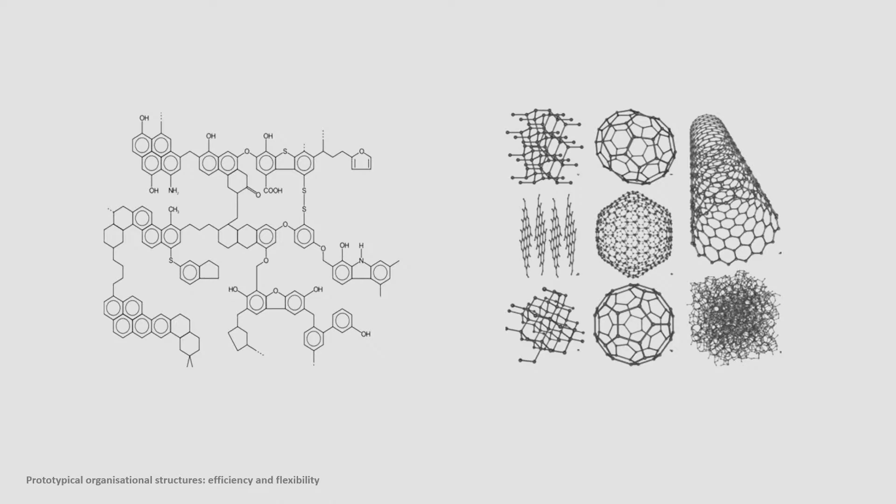So we started with the chemical structure of oil, which led us very quickly to the hexagonal grid, which turned out to be an extremely flexible, malleable system that can be extended into a field—an endless field. The idea of extending this into the future was something that could be achieved while retaining the coherence of the overall system. It's also a system where, through the connections of the hexagons, there are equal connections on all sides. This whole thing is malleable—it can react very smoothly to local forces, or to things that influence the geometry of the grid, and take on an infinite number of shapes.

So that's very interesting, as I mentioned before, because we were trying to use these forces to actually shape our building and our plan. The same operation then had to happen in the third dimension. So we had established this grid, established a base organizational principle, and then we needed to look at the third dimension. The base is a cell—a cell with an atrium in the center—that could equally be manipulated. The question is, how do we manipulate it and what do we want to achieve?

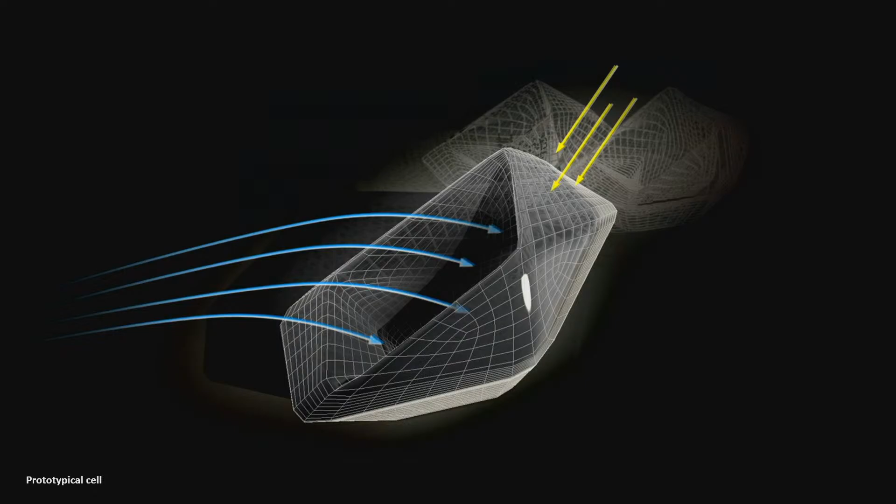So we did analysis about the prevailing wind directions, did CFD analysis on how to best shape the building to catch most of the wind. What helped dramatically is the fact that the prevailing cooling winds come from the north, and the sun comes from the south. That helped very much in setting out the base principle.

We looked at the courtyard, we looked at self-shading, optimizing the shape to get the optimum self-shading effect, and that's the base diagram of these cells. We then started adding one to another, shaping the building and the entire campus with the same principle. They need to react to each other because you need to catch the wind for all of them, which gives you the directionality you see there. And that led to this shape.

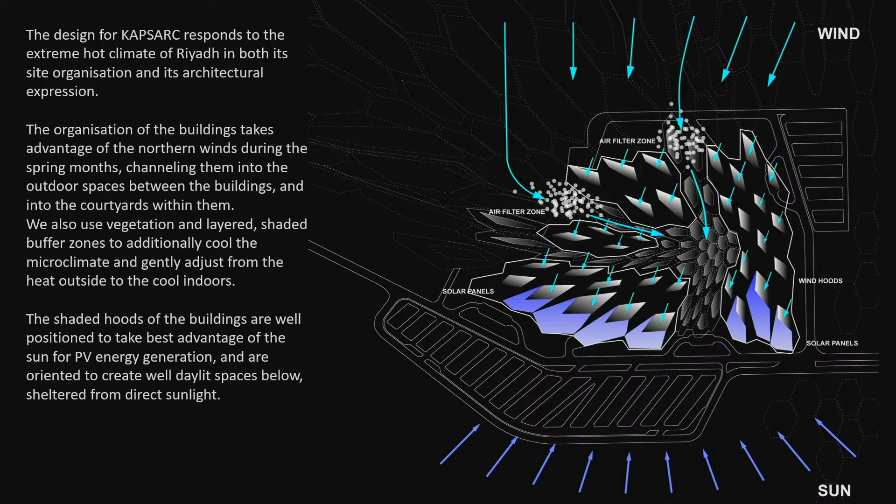You can see a bit of a summary of how this works in terms of how it relates to the natural forces on the site.

Briefly about the envelope: as I mentioned, it needed to be a very closed envelope. Daylight is something that needs to be heavily controlled in this environment. Another important aspect was a very aggressive timescale for construction. The key in Saudi, in the Middle East, is that where here we're keen to get a building watertight as soon as possible, there you need to get it sand-tight as soon as possible.

So the construction method chosen was a sandwich, corrugated metal tin shell, if you like, that can be built very quickly and efficiently to get the building sand-tight, and then have it clad.

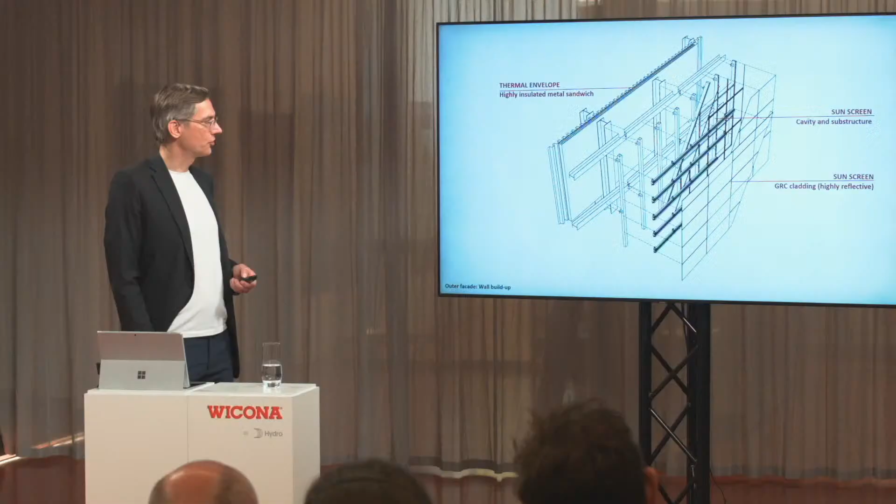Another important aspect is the cavity, just to cool the surface, because it does heat up a lot despite the sun shading on top. So there's a cavity, then substructure, and the actual GRC cladding put on top.

To achieve the LEED Platinum rating and the energy efficiency, we had to work with a very low percentage of facade openings. It was a large building, so how do you negotiate these very small, few openings with the volume? We turned to a traditional Arabic pattern, because that allows us to conceal small openings within an overall pattern that helps structure the elevations.

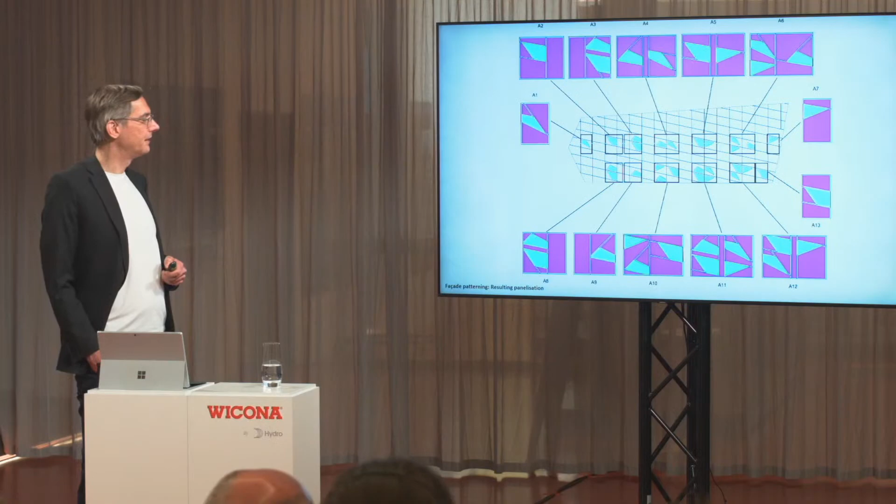You can see it here as very irregular shapes that then need to be panelized as well.

Where possible, we did integrate photovoltaic cells on the southwestern corner of the facade to generate energy locally where we could.

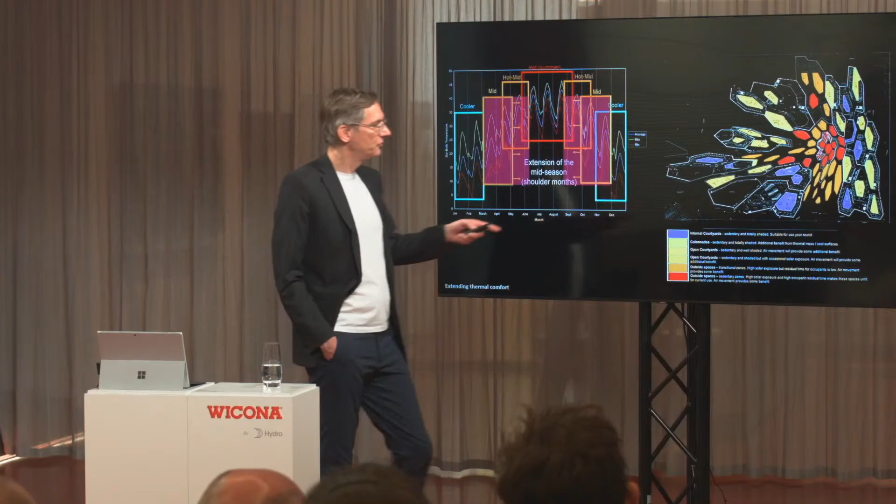Again, shading plays the most important role. The small courtyards that you've seen as part of the cells, we solved that problem by self-shading. For the central space, we needed to devise a canopy structure.

Looking a little bit at the sustainability credentials, if you like. As I mentioned, LEED Platinum. At that time, LEED was relatively new. It was not designed to be working in the desert. It was made to work in the Midwest in the US, or this kind of moderate climate. So it was a challenge to get there. We did get there in the end.

It's a mix of things. Again, we have very efficient building systems. It's almost a given, obviously. But then what is added in this particular project is the built form. As I mentioned before, the fact that we are using the built form to shield from the heat efficiently and effectively, and to catch the cooling winds, gives us a very different picture.

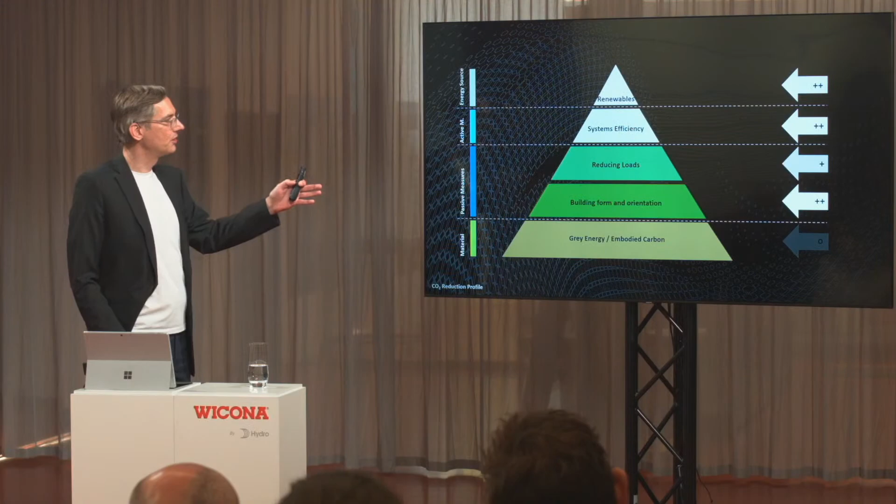Also, as I mentioned, PV is part of the building, but crucially, there was a huge PV farm that was set up by the client, so a lot of renewable energy was generated, which is very easy with the amount of sun there is.

What is interesting about this project is that although the client was very ambitious on one hand to get this building the LEED Platinum rating and make it efficient, on the other hand there was a hesitancy. So some of the innovations that were proposed were eventually not executed. One example is that we proposed, at the time, back in 2009, to use LED for the entire building. That was rejected by the client because they thought the market in Saudi would not allow for that at the time. They were afraid that if something goes wrong, they don't have the local capacity to deal with it. So LED was not used at the time, which from our point of view today sounds unbelievable. But at that time, those were some of the local concerns.

And equally, we had proposed a labyrinth to pre-cool the air before it goes into the systems. There was some doubt about the functionality of that. It was built but not commissioned in the end. So some of the battles you lose, but nevertheless, overall, it is still quite an efficient building.

Final project I'm going to show is the Forest Green Rovers football stadium in Stroud, Gloucestershire, in the UK. It's a project that's not been completed yet. We won the competition in 2016. Very different context, rural England, nice little town.

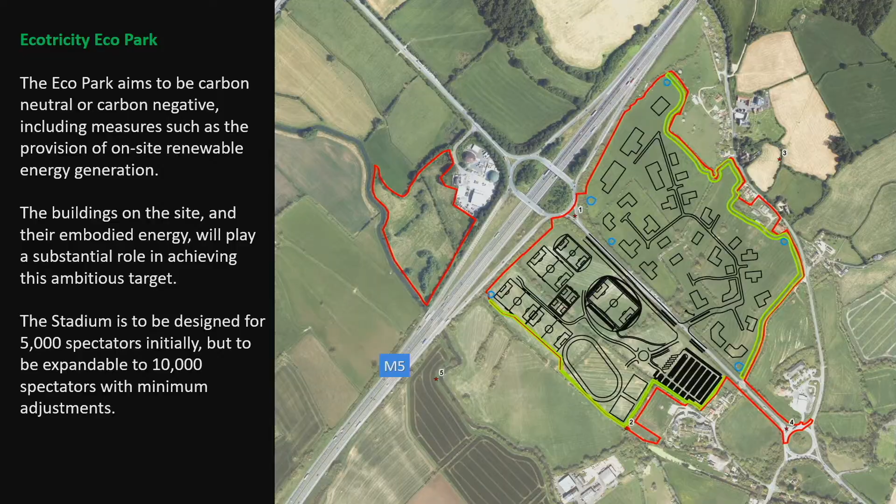You can see the site, rural site. So how to react to this site? It's a stadium with 5,000 seats initially, meant to be extended to 10,000 seats without too much impact. It is a building that wants to be very low from our point of view. It has this gentle undulating surface, and it kind of fits into this meadow landscape, but it also is one where materiality started to play a very big role.

Here you can see the idea of extending the stadium is very simple. You just basically add to the upper tier here, and you get the additional seating to get from 5,000 to 10,000 seats. You don't have to do anything to the envelope or the primary structure, apart from adding this diagonal.

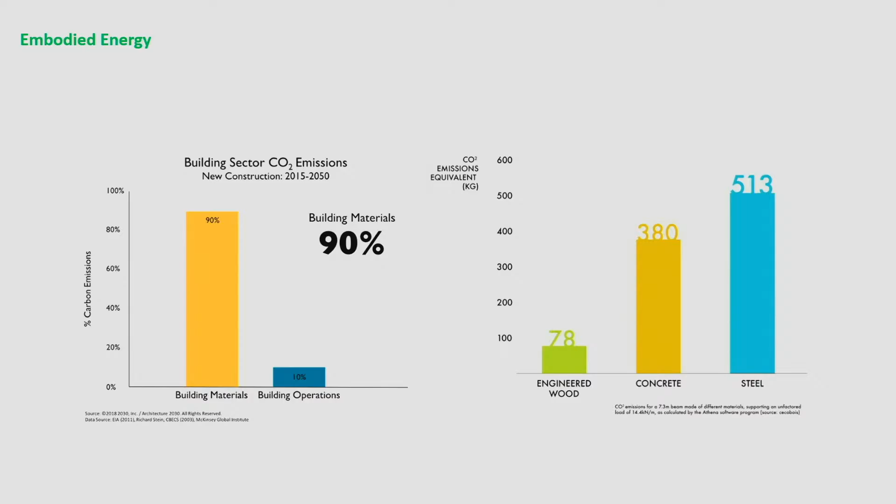I mentioned that before. We looked at different materials available, and the gap between engineered wood, concrete, or steel in terms of carbon emission was very big. So the choice very early on was to use timber for the structure, which also correlates to the rural setting.

We've heard a lot about the timber construction already, so I'm not going to go too much into that. This project was held up in planning for a while, but we're hopeful that it can be realized in the near future.

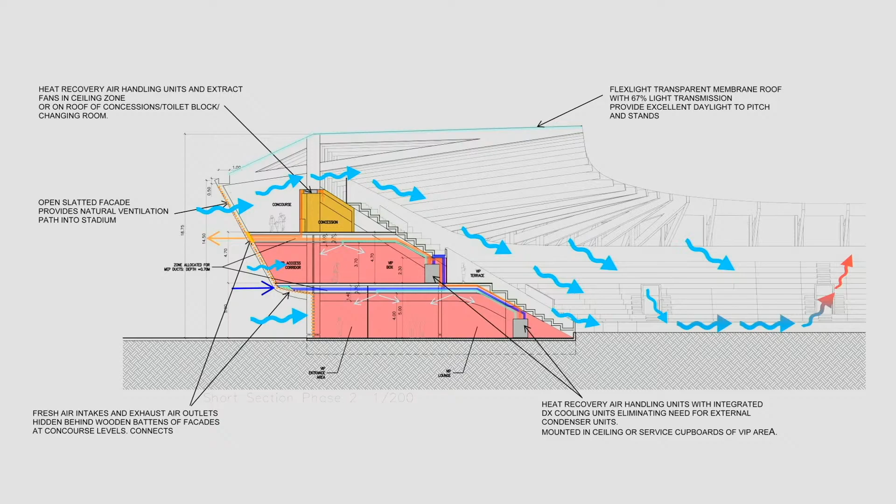Sustainability, as I said, building systems is just a given on any project. This building scores highly on renewables - obviously the client is a company that makes money out of wind energy. But crucially, in this particular one, it is the embodied carbon and the use of timber for the primary structure.

Thank you very much.

Thank you so much for your presentation. It's a completely different landscape setting, completely different type of building typology, but everything is Zaha Hadid Architects. In maybe 2-3 words, what describes Zaha Hadid architecture to you?

We didn't discuss that before, so it's... What describes Zaha Hadid architecture?

I think it is pushing the boundaries a little bit. We approach every project afresh. We don't have any preconceived ideas of what we want to achieve, how we want this project to look. There's obviously a certain interest in a certain fluid geometry, but it's not a given - we're not only doing these kind of projects, we do very different projects as well. So I think it is about pushing the boundaries and testing the limits every time, and despite the inefficiencies that are in this process, we like the challenge.

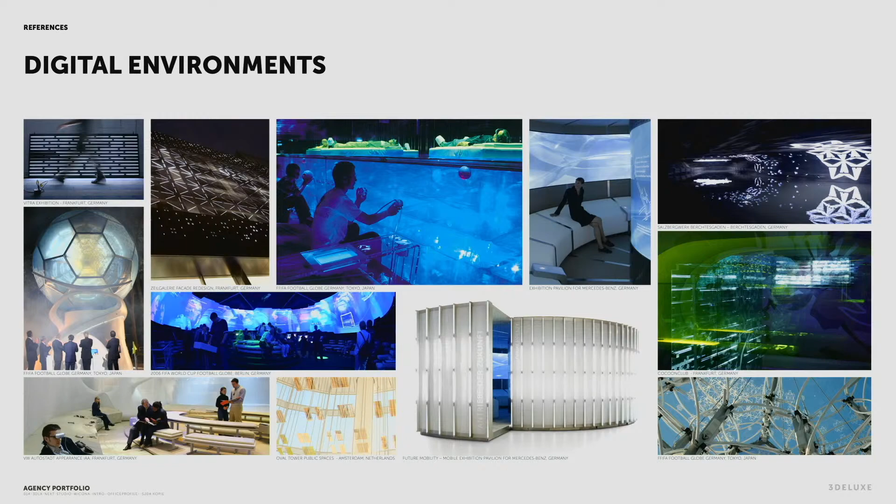So we are used to try to integrate technologies, communication technologies, into spaces, and we try to do this into architecture too. We are used to deal with content, and we think about our clients, what is the idea behind them, what is their corporate identity. So we are used to work with content, and our approach is very often more content and design driven, and less engineer driven. So maybe this is good to know when I show you some images from our architectural projects.

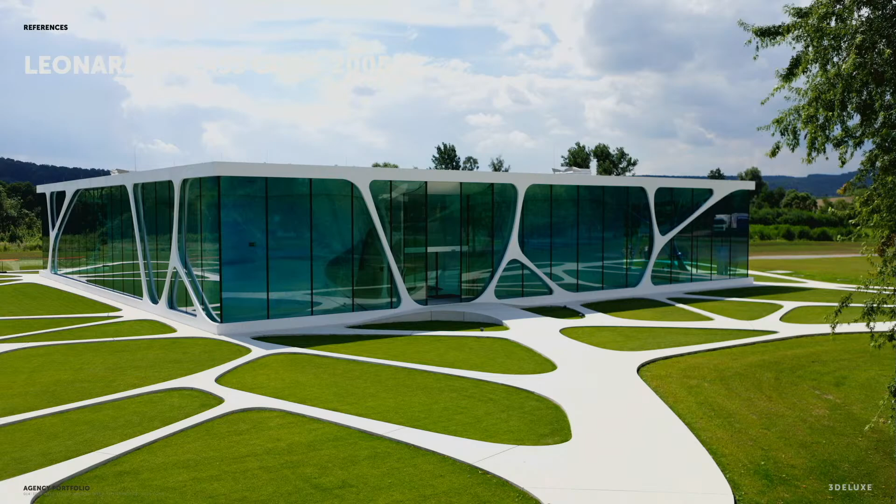It was situated in a very nice landscape, the building, and the client is very grounded there, and many people work there, so he wanted to focus on the building being in the right place. Our idea was that we wanted to integrate a huge artwork into the glass facade. We integrated a foil, laminated between the glass panes, and it was a huge artwork.

It was 6 meters high and 100 meters long, this foil. The idea was we took a lot of photos from the surroundings, very linked to this area in Germany with a special landscape, special housing. We put this in the foil, something like a big artwork. The interesting thing was that when you walk through the building, you see an interesting overlaying of the real landscape, which you see down there, and then the artificial landscape. So a very poetic approach, an interplay of where the building is situated and what the story is and how it is linked with the user and the client.

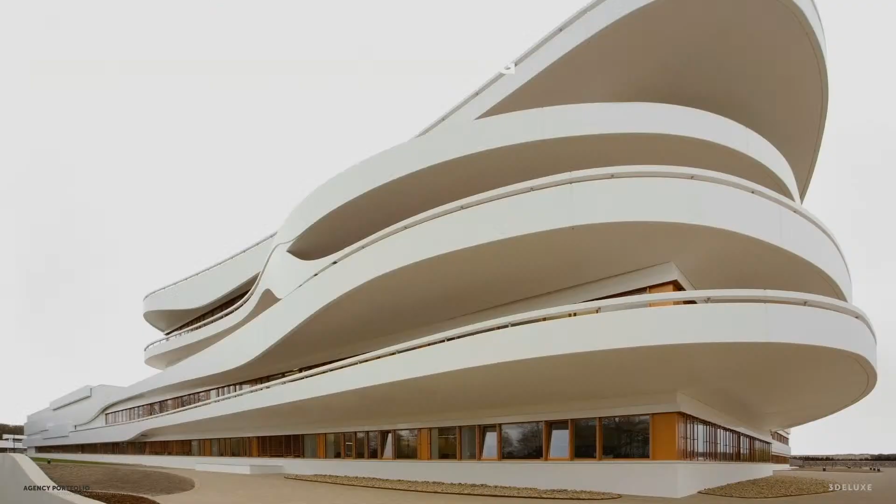This is more a sculptural approach to a building. This was for the headquarters of the Kaffee Partner company in Osnabrück, and they wanted to have a strong building. They wanted to say we are important here in the town, and we want to be attractive and positive and dynamic, and so we designed this kind of building for them.

So here you see three different approaches from buildings we have done in the last years, and we have the feeling that we as architects always have to find an idea. What is the idea of the building? What is the expression? What is standing behind it? Is it related to the client, to the company, to the surrounding?

We have changed our approach a little bit. We don't have the feeling that we have to look for ideas in the moment for buildings. We have the feeling that the ideas are there, you just have to work with it. So to say it a little bit poetically, like the introduction, we can say that the briefing for the buildings is written by the poor state of our planet.

We have the feeling that we are facing so many global issues at the moment that we all know - climate change, overexploitation of nature, and then the migration issues which result from this, the social issues. I think we have a lot of issues we are facing, and all these issues are popping up in our cities. The cities have to deal with all this stuff. And I think on the other side, the key for the solution of many of these things lies in the end in the development of our cities too.

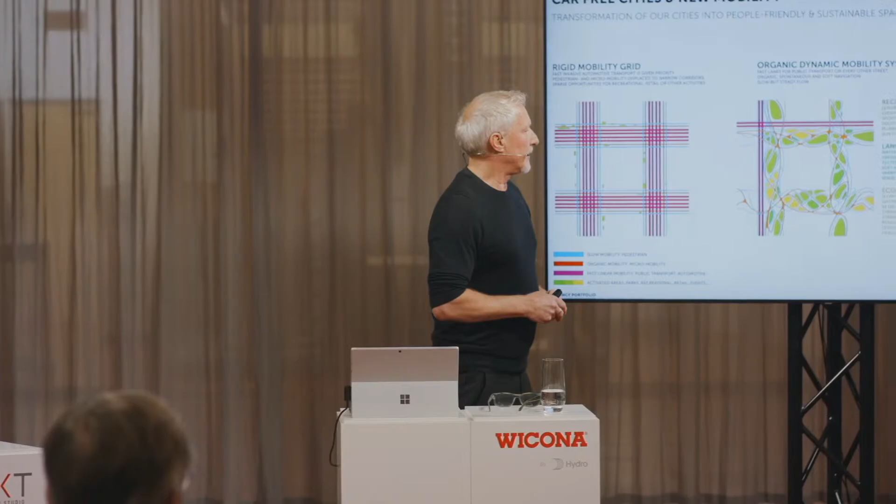You see it in many areas today: the boundaries between private and public space are dissolving more and more. For new build projects, it would be interesting if they could more interweave public space with private space. This will have an enormous effect on architecture.

This was a project we had five years ago in Lithuania, where we were contracted to redesign a plaza, much bigger than this photo shows, along with some buildings around it—new builds and some refurbishments. In the end, for us the most interesting part of this project was the plaza itself, because some years ago it was already clear that you would have more public space in the future and that cars would vanish more and more from certain areas of cities.

So we decided to make this project a kind of blueprint for how future public space could look without cars. You can see how this space was once dominated by cars and wasn't very inviting for people to stay in. This is how the plaza looks today—we opened it a year and a half ago. The idea was, in the end, that we don't have cars anymore; instead we have wide, interesting, dynamic lanes for soft mobility and micro-mobility, like bicycles, scooters, and all the e-gadgets we'll have in coming years, like e-scooters.

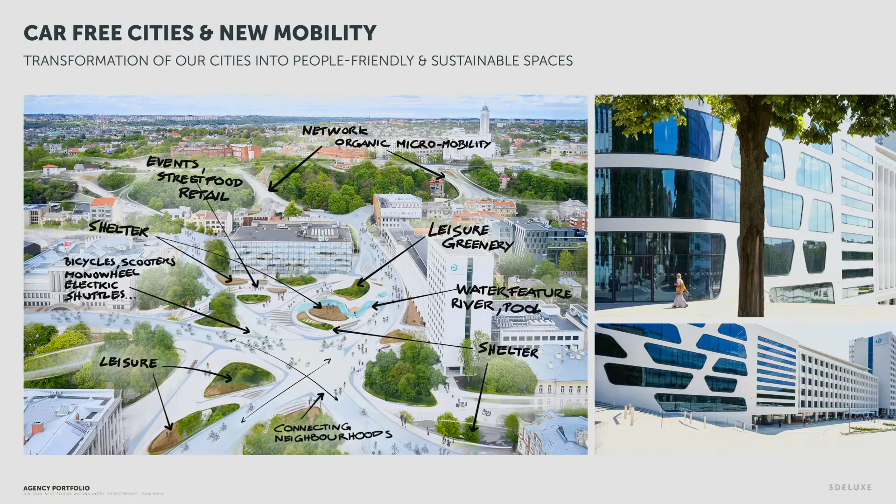On the right you see the buildings we designed around the plaza, but that's not the focus for this presentation since there was no new idea to share at the moment. Here you see the space for bicycles, for micromobility, which in future can be used by the slow

autonomous e-shuttles that will come more and more, for people who are not able to ride a bicycle, or who want more transportation options or are old, so they still have the possibility to use mobility through public shuttles. This image shows a little bit what we mean by the combination, the symbiosis of mobility and recreation and quality of stay in the cities.

Another important point is the densification of the cities, the smart densification, the green densification, and the shared spaces.

Here is a project we are working on at the moment, in Manhattan. We call it the ARC. The idea is to talk about the roofs of cities, because this is a neglected area—nobody has had in mind that we can use this for different things.

On the left side you see the current situation. This is the Manhattan meatpacking district, and you see there's just gray, an absence of nature. We have unused roof surface and a poor climate.

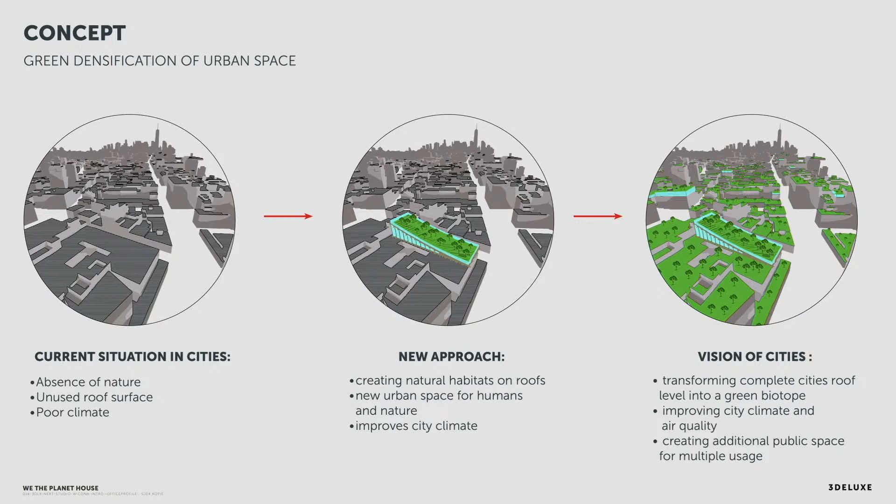Our new approach: our client wants a small office building for meetings and events, but they want to avoid soil sealing and don't want to go outside the city. So the idea was to put a building on top of a warehouse in the meatpacking district, avoiding additional soil sealing.

And on top of this building, we want to install a lush garden. So the new approach for cities is that we can densify with additional buildings on the rooftops plus additional greenery, which would have an enormous effect on the city's climate.

We can think about transforming the complete roof level into a green biotope, which would create additional public space for recreational purposes.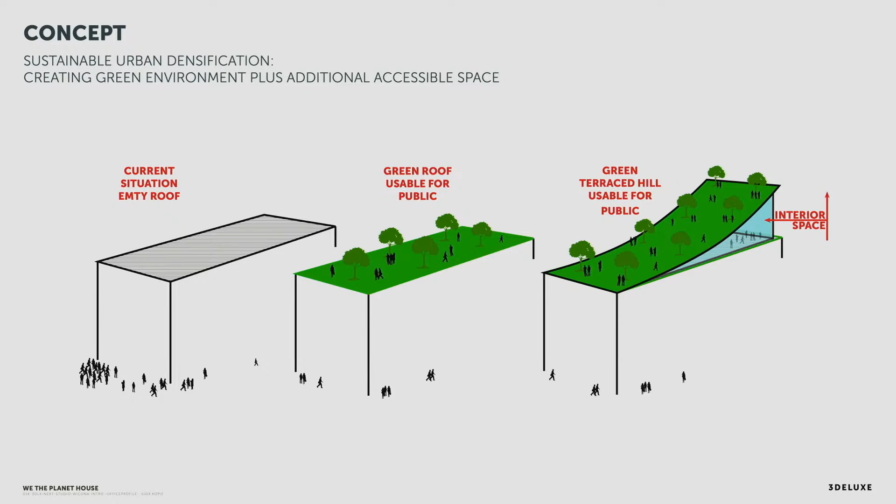For our project we said, let's lift up the garden and put a building underneath, so we have created something like a hill or a landscape in the city.

Inside, there's the open multifunctional space for the company, who want to host many different events and summits, and then they have one split level with their office spaces.

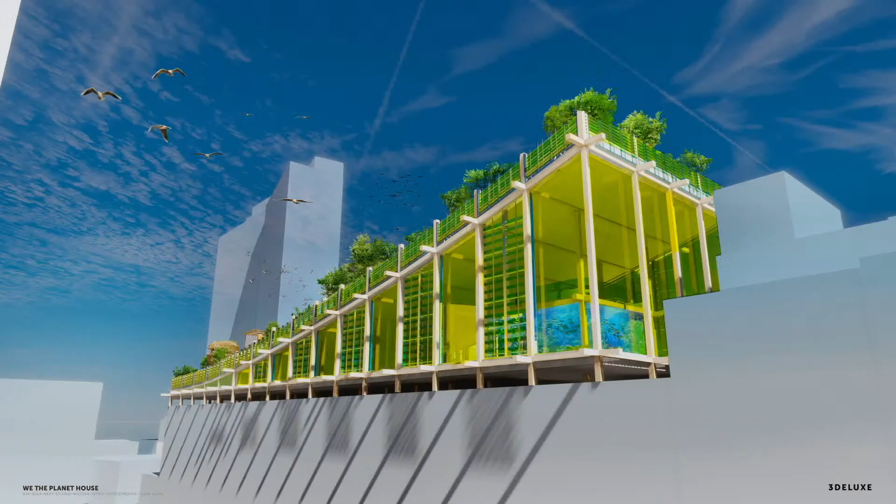This is the side view, and you see it down from the street.

If you look into the garden—this is something our client wants, and I think this is coming up more and more—they say a building today has to be socially interactive. As an investor you shouldn't just do your project without being interconnected with the neighborhood. If you invest in a city like New York, you have to give something back to the community.

In this case, it would be something like this garden, because people in this area don't have much green space, and they would really enjoy being able to go with their kids in this garden, maybe grow their own food there, and enjoy nature. That's the idea. In return, they have to take care of the garden and maintain it. So this is a completely new approach of a building that tries to interconnect with the community and the neighborhood, and this has a benefit for the quality of urban life in general.

Then there are some areas they said they want to have for schools, classes, and kindergartens, so children can go there and learn something about what the ecosystem is, why insects are important for everything, and so on. Many families in our big cities today don't have any experience of what nature really is, and so these little biotopes could help a lot, even for educational purposes.

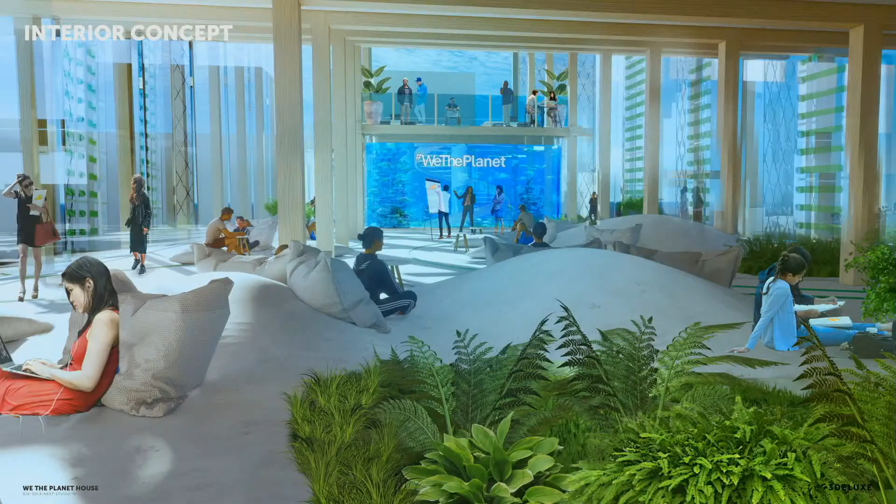So at the end, sustainability isn't just about technologies or insulation. A very important thing is how we behave in buildings—is it okay for us if we are not in a totally overheated room or a totally cool room, like in America, where we know in summer it's really cold inside, and this is definitely not necessary.

This is the inside view. It's more a multifunctional room for different purposes. And here you have it integrated into the cities—you see in this area there are a lot of additional rooftop buildings made in the last years, but they are all black.

And this is definitely, as we all now know, not a really good idea, because the city is really heating up in summer, and they have to cool all these buildings down with a lot of additional energy. So this approach could help a little bit to improve the city climate and reduce the energy the building needs.

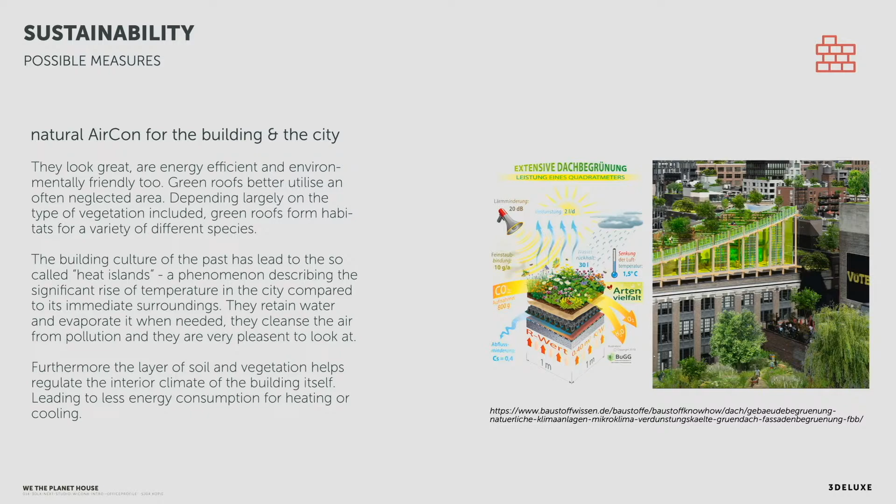We try to think through every detail of this building so it's as sustainable as possible. If we need concrete, we use green concrete as far as it's available, and we have a lot of technologies and materials integrated there. But in the end, we need more consultancy from climate engineering specialists who can tell us exactly what is working at the moment, and which of the many new materials on the market are worth taking seriously and using.

So there are a lot of ideas for how we can integrate solar energy. For example, this yellow foil—maybe it's something like a photovoltaic foil—but it's made out of waste wood, so something really interesting and new. I like the yellow color very, very much. This looks quite cool for a building, for a glass facade.

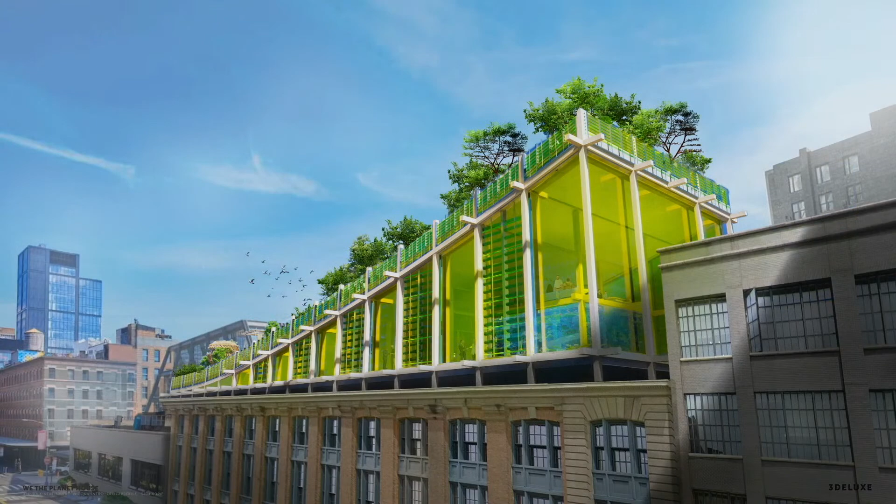And how can we integrate wind energy into the facade without hurting birds or whatever? There are many ideas, but we need the experts there. And how can we integrate bioenergy, algae bioenergy, whatever? So there are so many possibilities at the end, but we have to find out what is feasible at the moment. So here you see the building integrated.

As I was talking about, the facade—what can the facade do? Here we are talking about smart cities always, about smart buildings, smart materials. We opened this building last year in Karlsruhe. It's very close to here, for the FC Ingenieure, and it's a zero energy building in operation, not just in construction.

So there we weren't good enough, I have to admit—it's more conventional the way we built it. The only really interesting thing is the glass facade, and this is a new product from Merck called eyrise. This facade has a liquid crystal layer inside the glass, and it can control the heat coming into the building without compromising the view outside.

I think these are exactly the kind of smart materials we need in the future, buildings that are really smart. We need more digitalization in architecture, at least compared to other industries like automotive, or what a telephone looked like 100 years ago versus now. In other industries there's huge progress, but sometimes I feel the building and construction industry hasn't had the big progress we need. I know it's much more complicated and complex, but I still think this is a very important point.

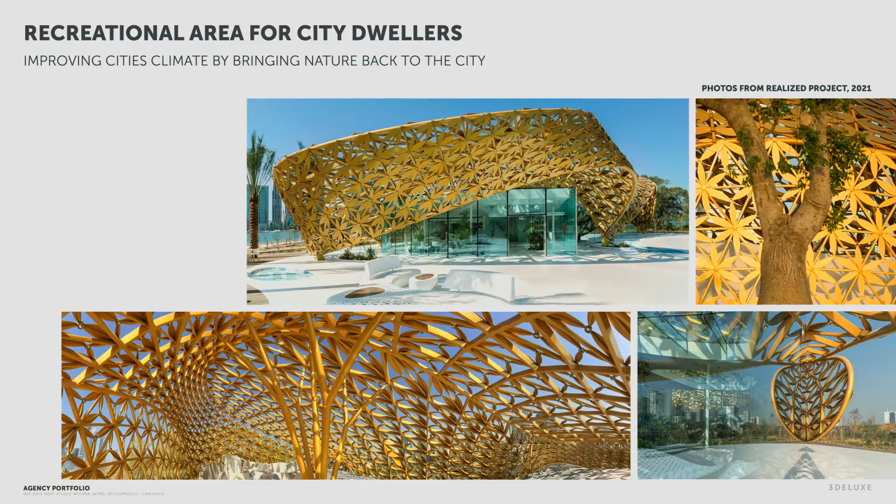We built some buildings on the island and a bridge there. At the beginning, as the plants were not really growing yet, the big attention was on the building. I still like it - it's a very beautiful building with this shading roof, which we developed together with Seele.

It was a very complex roof, with the idea of playing with Arabic ornament culture and the idea of flying butterflies, because there's a butterfly pavilion inside, and a little cafe.

In the cafe and the interior, we tried to integrate a lot of green and let a lot of daylight come in. The shading roof, the golden roof, was preventing it from heating up too much.

But after five years, when I go there now, what gets the big attention, and where people go, is not because of the architecture or the building, but because of the biotope, because after a few years it has grown fantastic.

The idea from the beginning was to use native plant species, not the typical decorative palm trees you find normally in parks, but just normal plants that nobody usually takes care of. Now it's really a nice urban biotope, and many families go there because they've never seen anything like this before - normal parks look totally different.

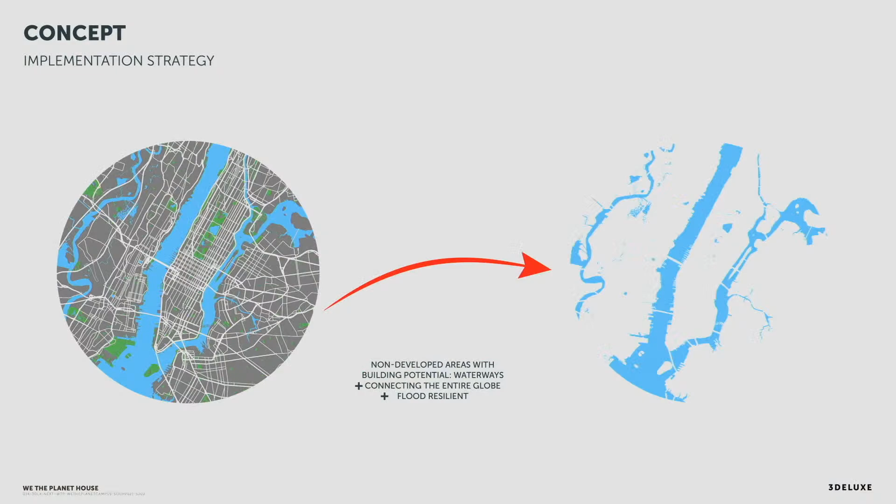Another very interesting point for this project is that, related to our experience with shipbuilding and living on the sea, we thought about cities on the sea. As we know, for architects in the past there was always a visionary dream in every decade about living on the sea or installing big cities there. We were thinking, they want to be in Manhattan - but Manhattan is really stuffed, so what about all the waterways there? We put out a map of the waterways and said, why don't we cultivate them in a clever, smart way, without destroying the ecosystem?

This could be a very new, interesting area because, as we all know, the rising of sea levels is a big issue for many cities. If we have something like floating architecture, this could handle that at the end.

There are other aspects why floating architecture could be interesting. We all know how difficult and expensive it is to bring all the material and workers into these cities. We know from shipbuilding that ships are built somewhere in the countryside, in areas where it's not expensive, and then brought to where they want to operate them. This could be a new approach for architecture - if the building is built somewhere and then brought here, in front of the skyline of New York.

The other approach for this building - maybe I should explain the briefing. At least they wanted office space, convention space, and summit space. Part of the briefing was that it should be, as much as possible, in harmony with nature, as much as a building could be - though when you build something, you always destroy something at least.

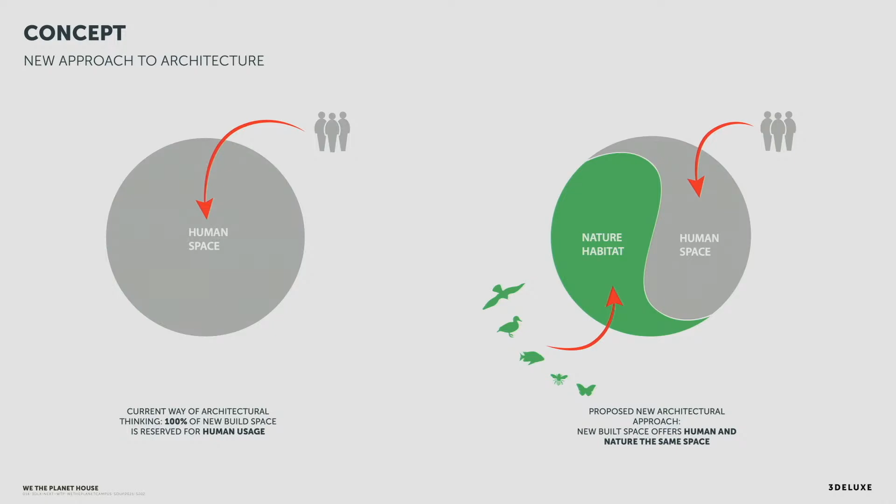So our idea was that there could be a new approach. Normally if you build a building, it's 100% for human space - we call it the 50-50 principle. What if in future 50% of the volume is reserved for nature? If we followed this rule, which I know is very expensive, it would change the cityscape completely, improve the city climate, and enhance the quality of life enormously. What's interesting is what new typologies of architecture could evolve from this - not just in the facade and balconies, not just on the rooftop, but integrating nature into a building in a 3D way.

So this is now our floating building. It's a floating platform, and 50% is reserved for nature - in this case, as it's in the water, it's a wetland biotope. And then you have different pavilions for different usages.

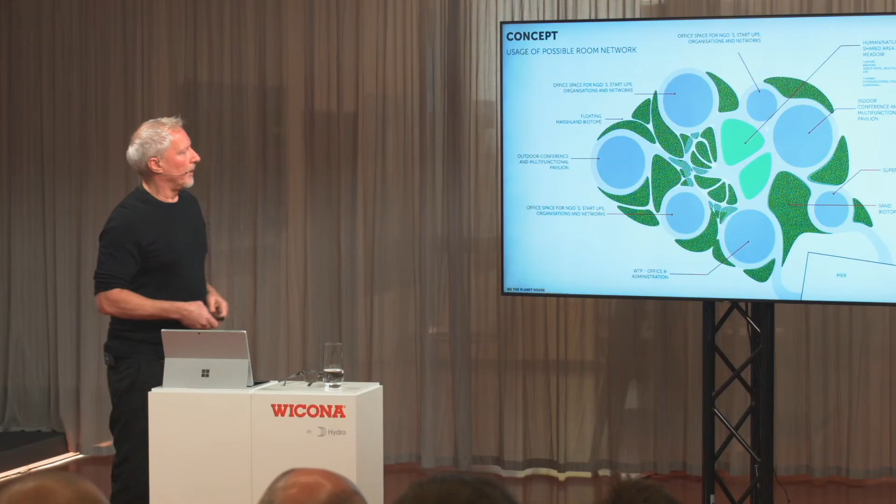For multifunctional pavilions, you have a little cafe, some conference and open spaces, and it's interconnected with a walkway. In between, you have the natural biotope. The idea is that it should be public, so people can use the open space, and people from Manhattan can walk over there and enjoy the nature, the fresh air, and the biotopes we want to install there.

So we put it on one pier. There's a little connection, you see it here from the top view. 50% is this green biotope, then you have the pavilions with different usages, and then it's connected to the pier, and on the pier it must be connected to the city with the electro shuttle and the bike lane, so people can come and walk around.

And so the client wants it to be a totally communicative space where they can make their exhibitions and spread the ideas from their organization. They want to communicate with the people, so it should be an open space.

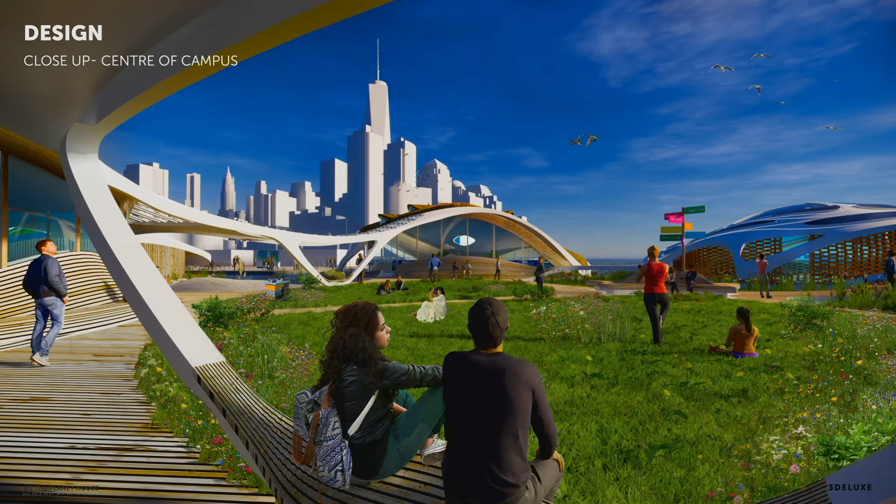And there is this insect meadow, for bees and everything. This should be installed there, and then we have this floating mat, this wetland biotope. And then there is an open pavilion, for conferences — so that if we're talking here about climate change in this conference, it's okay if people are outside with a warm jacket. This is what you'll have to do in future.

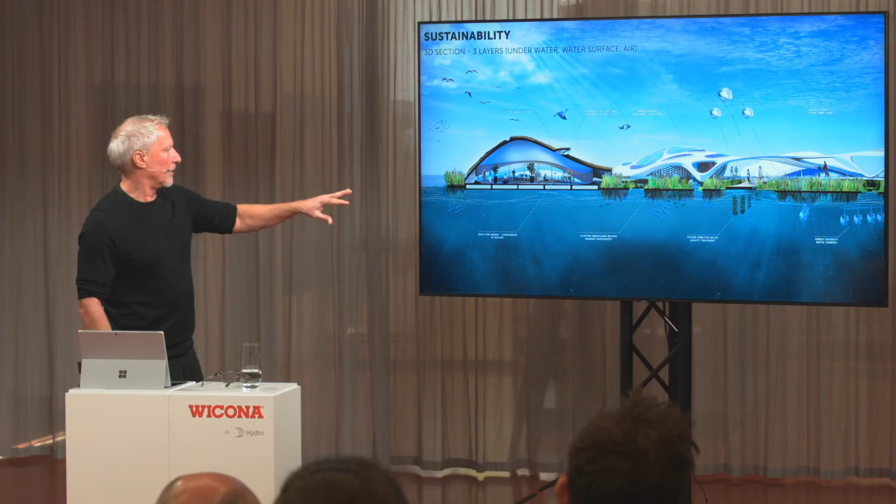And so here you see a section. The idea is that everywhere, on all levels, we install different things to generate energy, like a flying wind farm, water turbines, an oyster farm for water treatment. All this floating marshland biotope is also good for cleaning the water, and they generate different biotopes on different levels. Then we have the reed roof, which is a biotope for birds, and in between are the rooms where they can do their work.

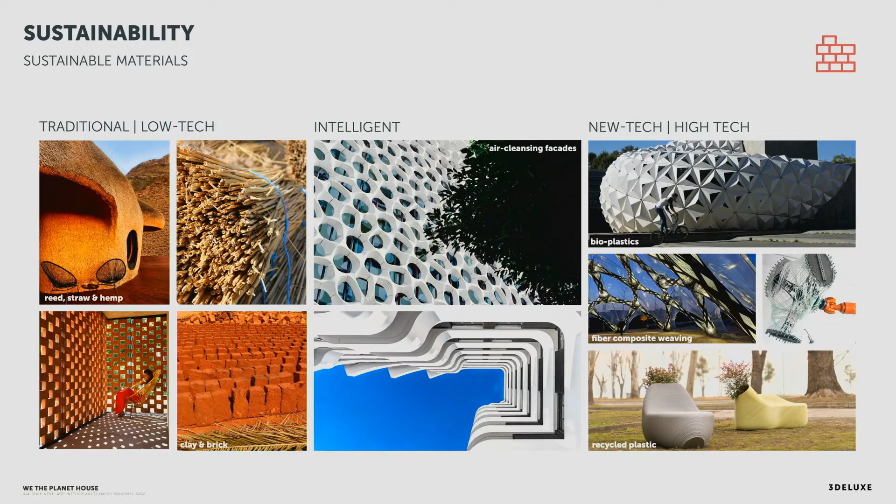And what kind of energy diversity can we bring there: wind energy, bioenergy, solar energy, water energy. What kind of materials — traditional low-tech like reed, straw, hemp, or intelligent ones like air cleansing facades, or new high-tech materials, or bioplastic recycled materials — this should all be included. And at least, when you have a floating platform, the idea to add more and more modules is very close.